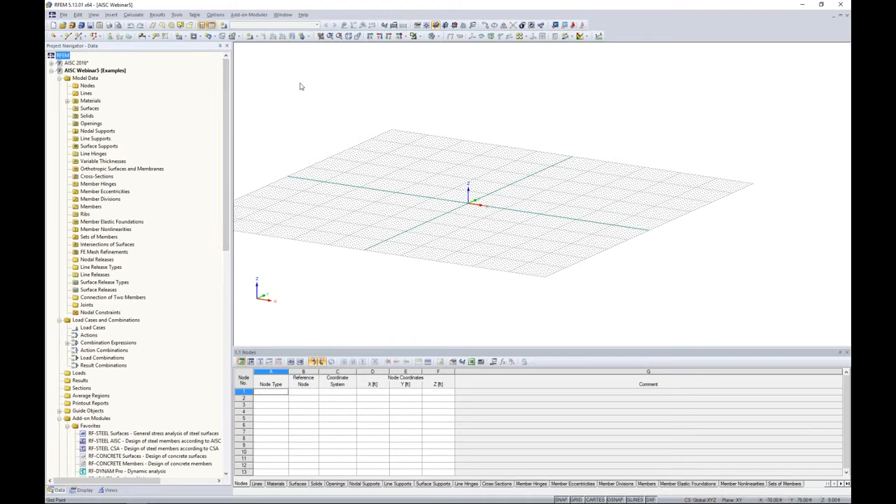So to begin with, we want to start off with drawing a truss. Now, we could normally go in and create our members individually and snapping to different points, but under Tools, Generate Model Members, we have several structure generators here: 2D frames, 2D trusses, 3D frames and trusses. We can even generate stairs. So we'll start off with a 2D truss.

And up pops our dialog box, and you'll notice that we have many different options when it comes to truss design. In addition, you can specify how the diagonals will be laid out, our web members. So if we take a look at some of these different options, they will go ahead and update depending on which selection we've checked here.

We'll start off with this second selection, and our diagonals will be the default for this first selection. The parameters are just our geometric information. The number of bays, we can set this as 6. The total length, which would be the span length, we'll set this as 50 feet. The total height is going to be measured right here at the center line, set to 7 feet.

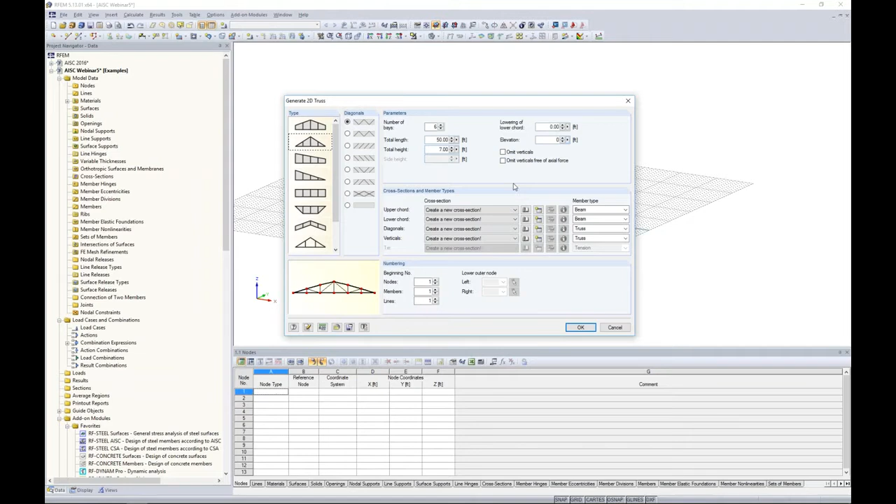Now we have a couple other options here. We can lower the lower chord member here by a certain distance. For example, if we set this to 10 feet, you'll notice how this picture changes. Same goes for elevation - if we make some changes here, then our picture is updated for how our truss will be generated. So moving on, the cross sections and member types.

So we must define the cross sections for our chords, both upper and lower, as well as our diagonals and verticals, our web members. The program is telling us that we need to create a new cross section. So for this, we will open up our cross section library.

You can see here that we have many different cross sections. For today, we'll begin with the rolled sections, and in particular the HSS. So when I enter into this dialog box, over on the left, we have some filters. For today, we'll be working with the AISC, but you can see here the ADM, we have Canadian sections, and even further, we can filter to the AISC 14th edition or the newest 15th edition.

Now, for square and rectangular HSS members, we do have a rather long list. So what's useful in this situation is to create a favorites group. With a favorites group, you can select a handful of sections that maybe you use quite often. And for today, I created a favorites group called USA that just has some sections relevant to today's webinar.

So now for my rectangular HSS, I can choose my 12 by 8 by 0.5. Regarding material, when you first create a new file, concrete 4000 PSI and steel A992 are going to be the default materials. For an HSS section, we actually want to choose a different material from our database.

For this, you can import in from the material library. Now, this looks similar to our cross sections. Over on the left, we have our filters, which we'll set to ASTM, and we have implemented the latest materials from the 2016 standard here. Again, an even longer list. So we can utilize that favorites group where we've added a handful of materials.

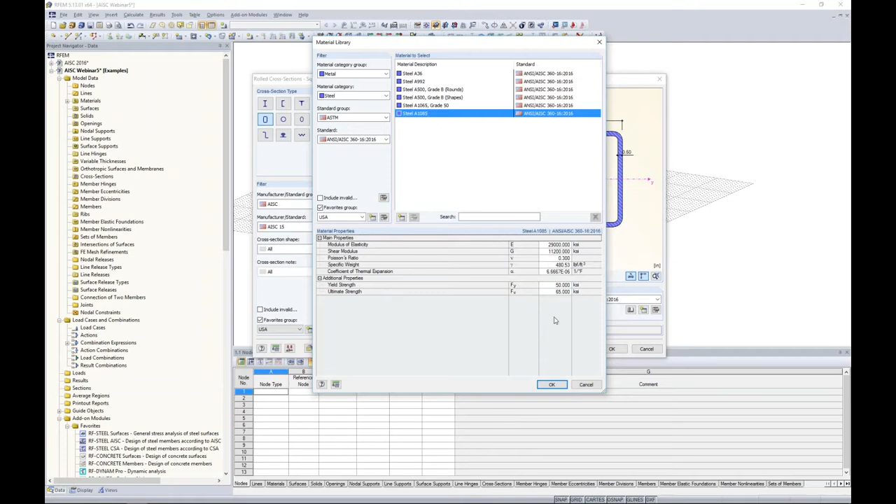Here are material properties listed down in the table. So once I've created this material, I can choose it from my selection box here. We click OK, and we click OK once again. Now, that same material and cross section is populated for all of my members.

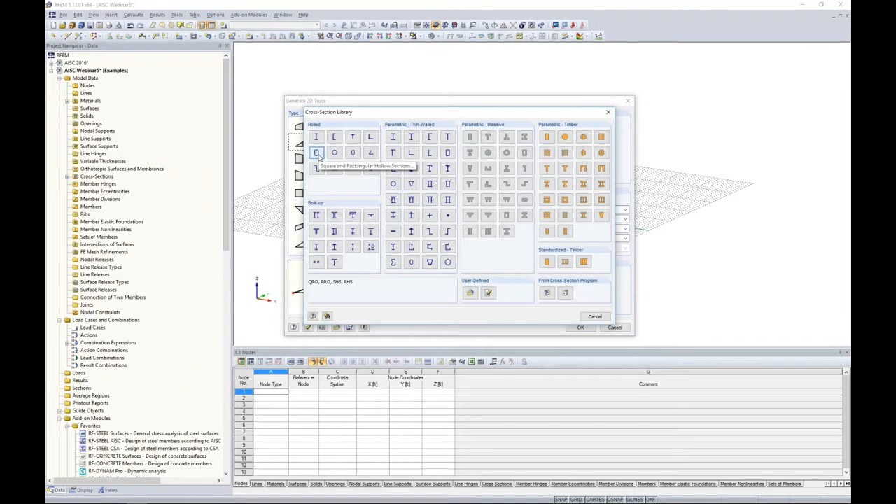Well, for the diagonals and verticals, I actually want to create a new cross section type, again under HSS, under my favorites group USA, and this time I want to choose a square HSS 5 by 5 by 0.375. I want to choose steel A1085 for my dropdown.

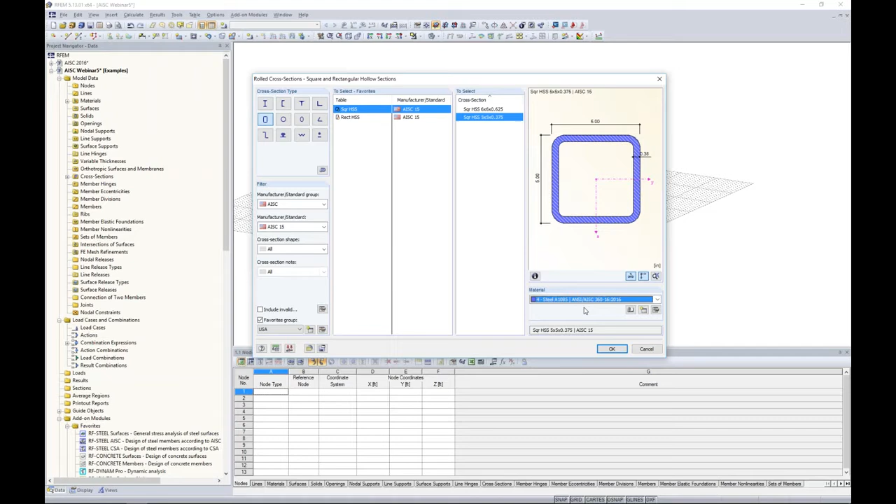You can see I accidentally entered it in twice here, no problem. We'll select the fourth material here, 1085. That will always be available now when I go to draw a new member because I've defined that material within this particular file. And I click OK. For the verticals, we've already defined the 5 by 5, so now I can choose it from my drop-down box here as well.

Regarding the member type, this is important because you can see here that we have many different members within RFEM. You can choose a beam member, a rigid, tension only, compression only, cables, because we are a nonlinear analysis program. So a beam member is going to be nothing special, just a typical beam or column.

A truss member, which the program automatically inputs, is going to set a moment end release, so we're only transferring axial and shear forces. That's just a quick application rather than manually applying those moment releases for our web members here.

Once we're done, we can click OK. You'll notice that our input material is listed here. The blue is what we're not using. I input steel A1085 twice, so all I need to do is select that, hit the delete key, and now we only have one listing of 1085.

Moving on to the columns, I'd like to just draw a member as we would within our toolbar, a new single member. I want to define a new cross-section type, and I'm going to choose my rolled hot sections, but a W shape here.

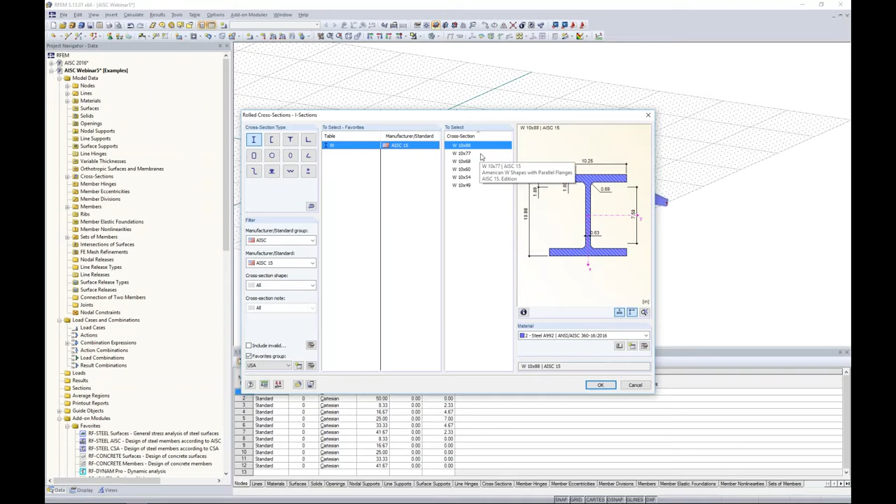Activating my favorites group down here with my checkbox, I've added in some W10 by members. Maybe I'm not totally sure which 10 by member I want to go with yet, so I'm going to select one of these sections from my favorites group. We'll start off with a 10 by 88.

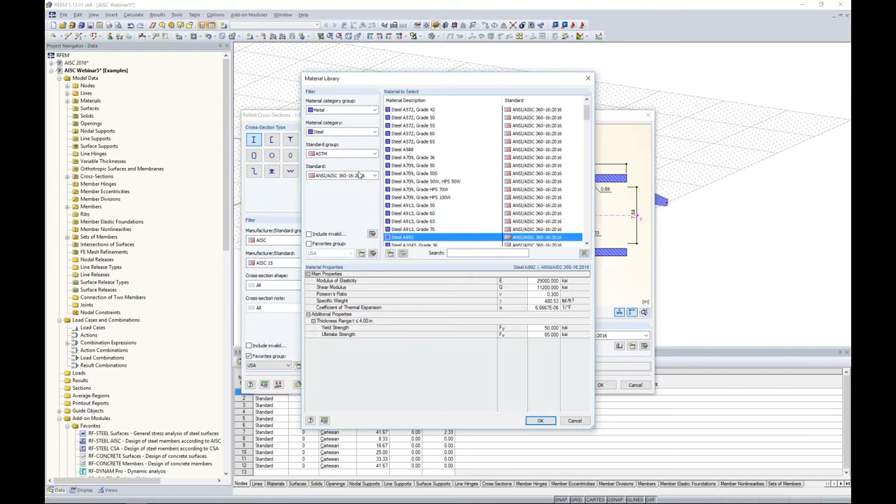Now, Steel A992 is one of the defaults within the program. Currently, it's set to the 2010 standard. At some point when the 2016 is more widely used, we'll transition to the 2016 Steel A992 to be default. But for now, if you'd like, you can change this to the 2016 Steel A992 for consistency. We'll click OK.

The member hinges, we'll leave these as fully fixed. We'll see a little bit later on how to apply a moment end release. I click OK. Now, typically, I could snap from one point to the other to create my columns, but we have a nice feature here.

All I need to do is specify the length and direction. So I'm going to specify my columns at 20 feet in height, and I want to draw this column member perpendicular to my current work plane, which you can see here in the negative direction.

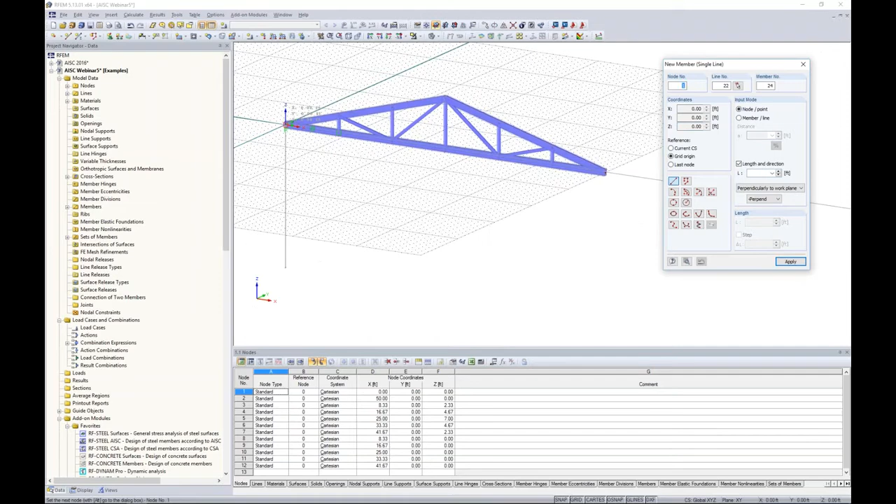Now when I just snap to the end nodes of my truss, I hit my right mouse key to escape, you can see that those columns were automatically drawn in the right magnitude and direction.

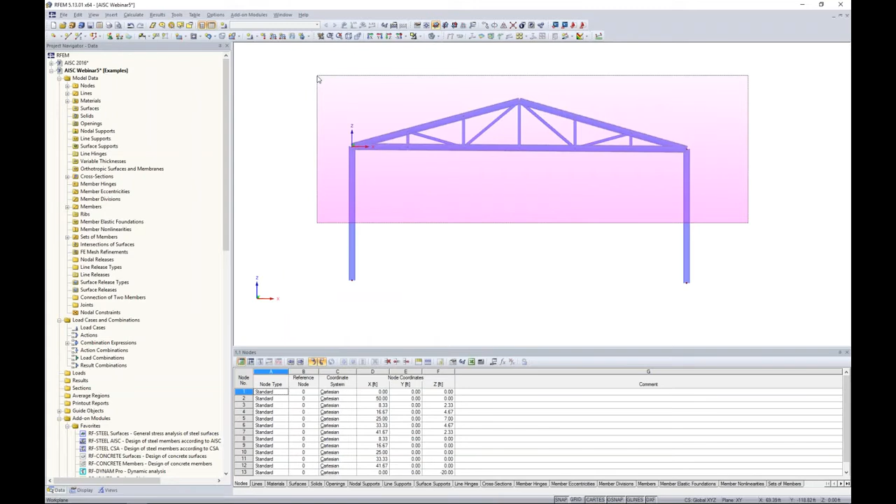Now that we have our first frame and truss drawn here, I'm going to use my selection box, and you'll notice that I'm paying careful attention to not select my nodes down at the bottom, and there's a reason for this. Just like in AutoCAD, with this selection box, we drag it over our frame.

I'm going to turn this into wireframe view and zoom in here. Holding down my control key, I'm going to unselect a couple of these nodes at either panel point on either side of the truss. Now you can't really tell graphically, but there's a reason why I'm doing that.

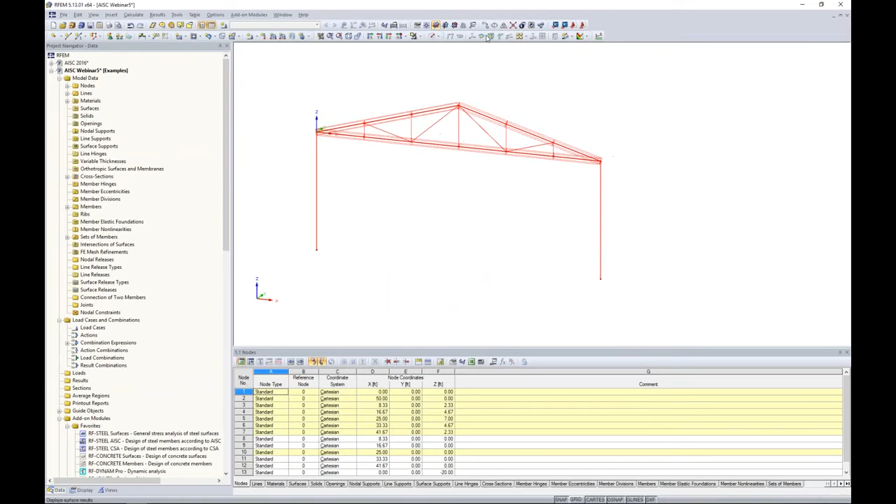We're going to move on to the Move Copy tool. We're going to create 3 copies in the global Y direction of 20 feet. So Move Copy, nothing too special here. But under this option, Edit Expanded Settings, we can actually create lines between copied nodes. This is why I was careful to highlight some nodes and not others.

Even more so, we can assign a cross-section to those copied lines, or in other words, we're going to create members between the copied nodes. If you want to utilize one of the cross-sections already within the model, you can select it here from a template member, or we can access our cross-section database.

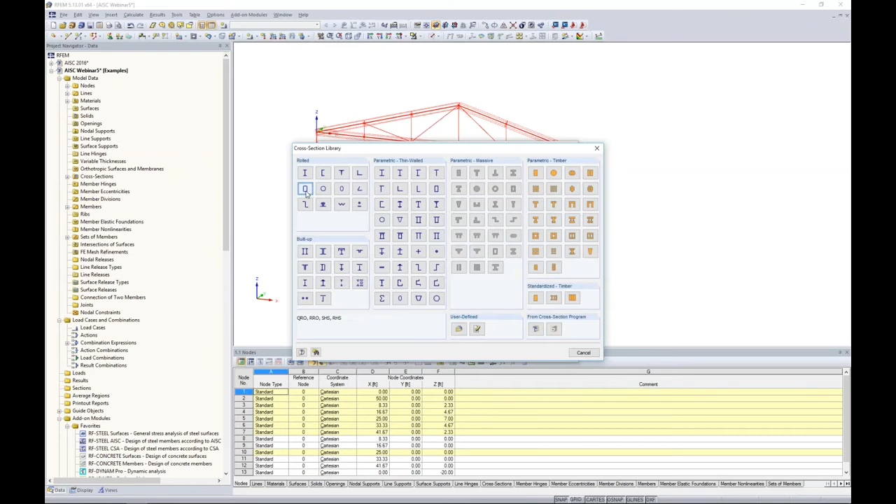This looks familiar from what we've seen before, and we can choose once again a new HSS member. This one will be a 6 by 6 by 0.625. From my drop-down, I can select my Steel A1085 material.

I click OK. The member hinge, right now it's set to fully fixed, so that's what a beam type is. Now I could easily change this to a truss member if I'd like to release the moment by just simply changing the member type here, or you can always manually apply a member hinge.

By creating a new member hinge, you'll see here that we have 6 degrees of freedom, 3 in translation, 3 in rotation. You can fully fix or fully release these. The program's making the assumption that you probably want to release the moment. We also have partial fixities with these spring constants.

So if you don't have fully fixed or fully released, but somewhere in between, you can specify this spring constant for any one of the degrees of freedom. Lastly, we do have nonlinearity.

If we take a look at the diagram and expand these details, we can account for things like tearing or yielding for our member ends. So it's quite powerful in terms of the nonlinear capabilities as well.

For today, I just want to create a moment release. If I hit OK, that moment release will now be available. That's member hinge number 1, and I can select it from the drop-down for the member end as well. So I click OK through all of these dialog boxes.

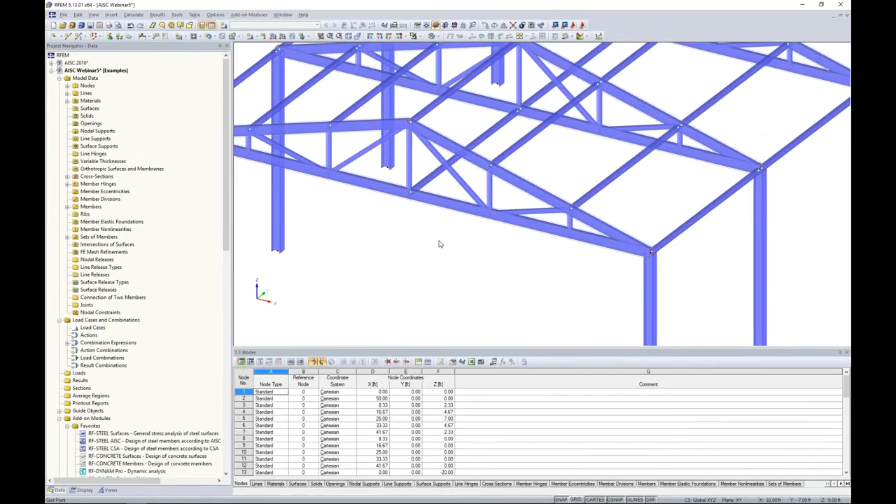At the bottom chord, I don't have any lateral restraints except at the midpoint, where I left one HSS member bracing my bottom chord. So that's really it as far as the geometry for our structure.

Now we want to support it. Up in our tools, we have a new nodal support. We also have a line support for maybe the bottom of a wall, and next to that, a surface support for, let's say, a slab on grade if we want to apply soil spring stiffness. For today, we're sticking with the new nodal support.

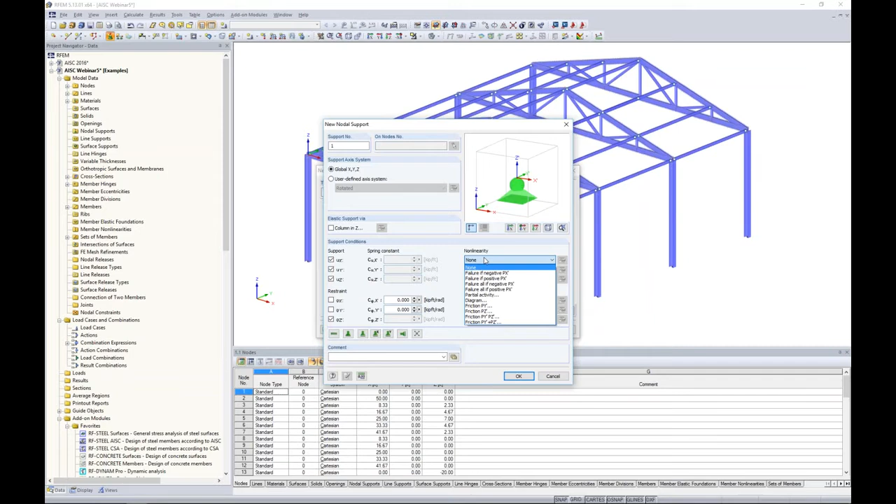We have some defaults here: hinged, rigid, fully fixed. We also have sliding. Of course, you can create your own new nodal support definition, and this should look quite familiar—similar to our member end conditions. We have our 6 degrees of freedom, partial fixity, and nonlinearity to take into consideration if we'd like. Nonlinearity might be important for sliding or friction supports. For today, we will stick with one of the defaults, which is fully rigid.

I click OK. All I need to do is rotate my structure around here, select the bottom nodes, and my rigid supports are applied.

Now, if I think the supports are maybe a little too big for this structure, what's nice is that I can always right-click on these supports to decrease the size. Now you can see all of them are a little smaller in size. The same thing goes for loads applied to our structure graphically as well, just something to point out there.

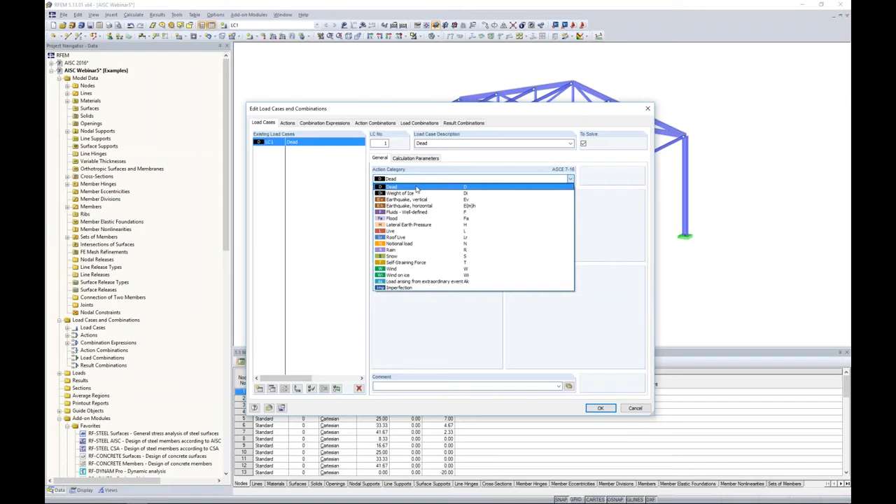Okay, so the geometry and supports are completely done for our structure, so we want to move on to loading. For this, we want to create a new load case, available in our tools. The first load case description will be dead load. The action category is set to dead. Action categories are important because the program needs to know what load factors to apply to which loads.

Based on the ASCE 7-16, the self-weight can automatically be accounted for within the dead load with this checkbox here. You can see -1 in the global Z direction. Our global coordinates are shown here.

Creating a new load case, we'll call this one live. The action category will be set to live, and self-weight will be unchecked here. For our third load case, we'll call this one wind 1, with the action category set to wind. And for our fourth and final case, we can just make a copy of this and rename it to wind 2.

Jumping to combination expressions, you can see the program is going to automatically create 2 expressions, LRFD and ASD. If we're curious to know what exactly the expressions are in relation to the code, we can click on this little info button, which will show us all of the ASD load combinations directly from the ASCE 7-16 section 2.4.

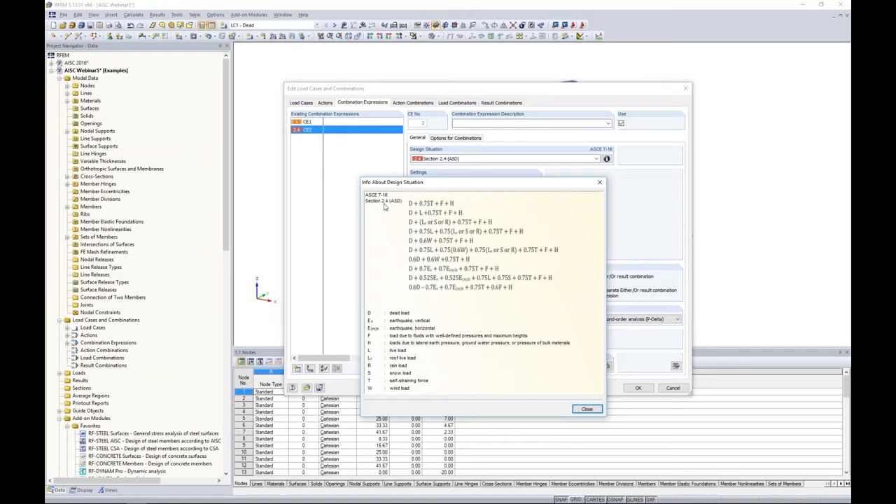To lay this out more clearly, we're going to jump to the load combinations. These are the actual load combinations generated by the program for both LRFD and ASD, only applicable to the load cases we've defined—here you'll see dead load, live load, wind 1, and wind 2. Lastly, we have our result combination, which is just an envelope solution.

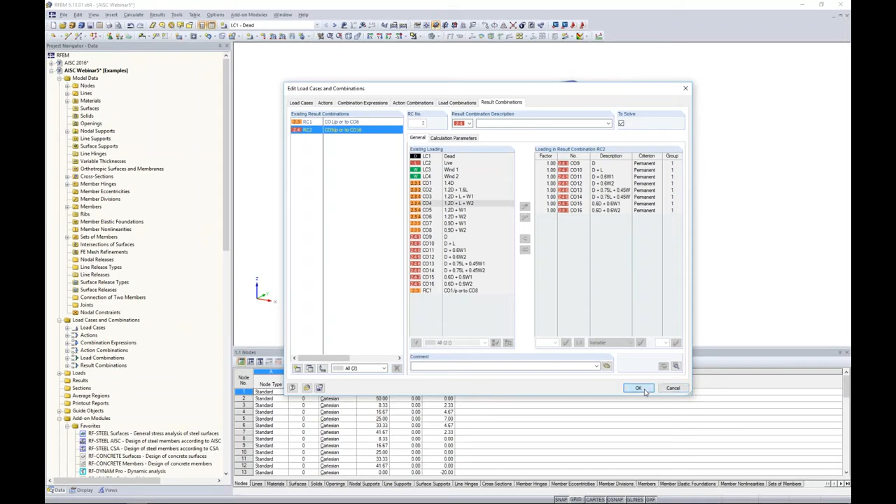If we're looking for maybe the highest or the max or min forces on our structure for all of the LRFD load combinations, we'd want to look at a result combination. We also have a result combination for ASD set here for maybe seeing what the worst case deflections are for all load combinations together. So once this is done, we click OK, and we're back in RFEM.

Now, utilizing this drop-down box, we want to make sure we have the correct load case available here before we move on to applying loads to the member. Dead load, we're going to assume that just self-weight is fine for today's example. I'm not going to add on any other loads. So we'll scroll then to live load.

Now for live load, under tools, generate loads, we have the option here for area loads on members via a plane. The first thing we want to define is the load magnitude in the global Z direction. The magnitude here will be -0.05 kips per square foot. Then we just need to graphically select our corner nodes.

So the first thing to select would be over on the left side of the structure. We're going to choose one plane here. Now I want to do the same thing on the right side of the structure, and what's nice is I can do this all within one step. So now we have both planes defined on either side of the structure.

We can remove the influence from either single members by individually clicking them, or we can choose a reference member so that all members parallel to that reference member will be excluded from this load. For example, if I'd like to exclude these intermediate members between my top chords, all I need to do is select one of them. All of them are now not selected to be considered for the load. I click OK, and we can see here that the load is now shown graphically.

Now, this is a pretty clean look, but if we're interested in how the load is being distributed to my members, I can right-click and display separately. So now we can see exactly what those member loads are based on their tributary area, and you'll notice that all of my intermediate HSS members were not taken into account.

Moving on to wind load. So for wind load, under tools again, we have generate loads from either snow loads or wind loads. For wind loads, we have vertical walls with roof according to the ASCE 7-16. Now, same thing goes for snow load as well. The wind and snow load generators are for pretty general type structures like what we're utilizing today and what you see in this picture. Anything outside of these general structures will need to be accounted for by manually applying those loads.

So we want to put in some velocity pressure and other components that are important in terms of determining what the load should be according to the ASCE 7. We'll just go with the basic wind speed of 70 miles per hour. The building mean roof height can be set at 23.5 feet. The rest of the factors, we'll leave as default.

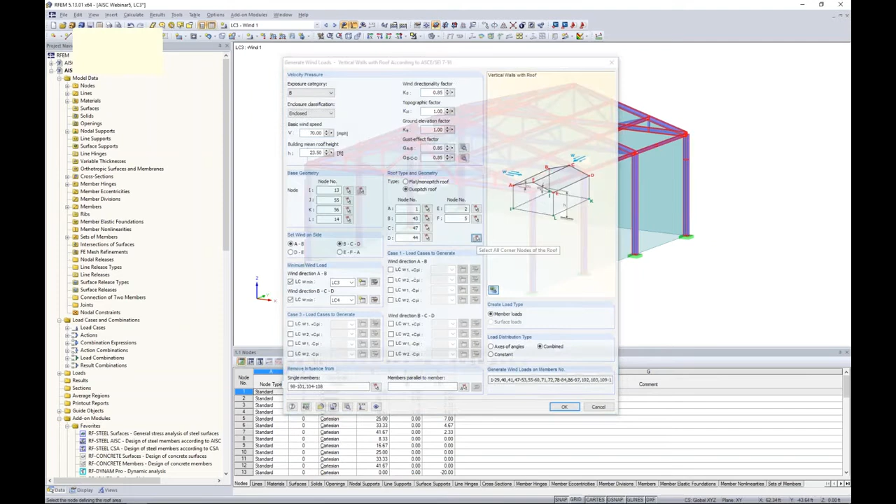And then for a dual pitch roof, I'm going to select my 6 nodes up here at the top of my roof. Now, if you incorrectly define this geometry in some way, the program will gray out the OK, so you won't be able to apply the load, and you'll know that you did something wrong with selecting the geometry.

We can generate case 1 and case 3 from the ASCE 7. We also can take into account minimum wind loads from this standard. For the sake of today's example, I'm just going to account for minimum wind loads in 2 directions. For the first direction, we can set this to the load case we previously created, LC3, which was wind 1. For the second wind load case, we can set this to LC4. Again, you can remove influence from single members here or members parallel to a reference member.

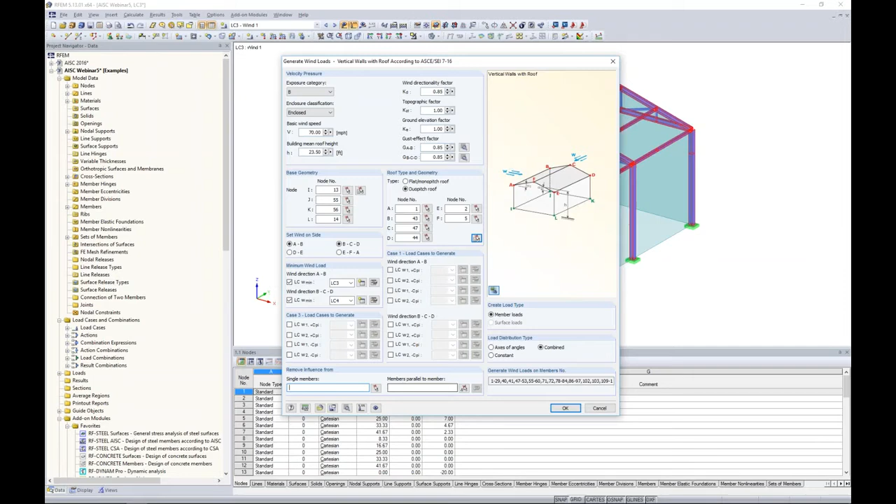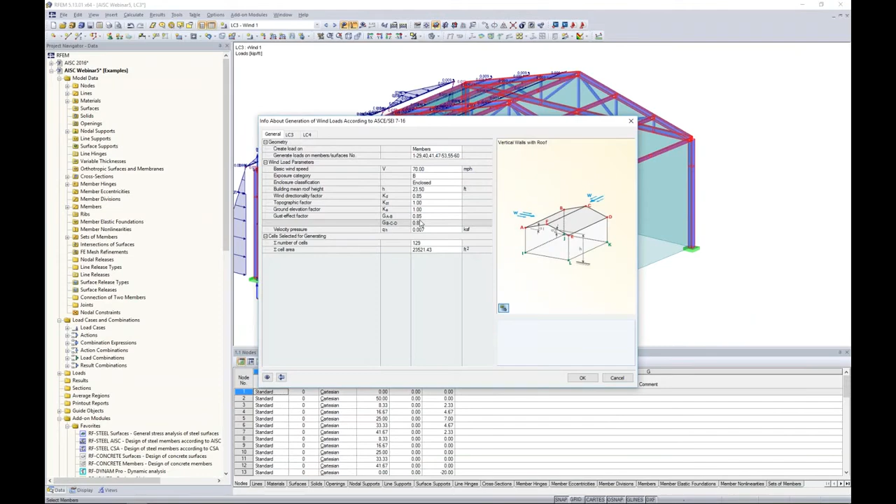For our case, if I graphically select my web members, maybe I don't want the wind load attributed to these web members with my truss. So I just graphically select all of them. You'll notice they're now not selected in red. I click OK, and now the program is going to give me some more information based on the calculations that were done.

I click OK, and now we can see these wind loads applied to the structure. This is for load case 3, and I can take a look at load case 4 from the other direction. Okay, so loading is complete. We can scroll through some of our load combinations to see how these are applied together.

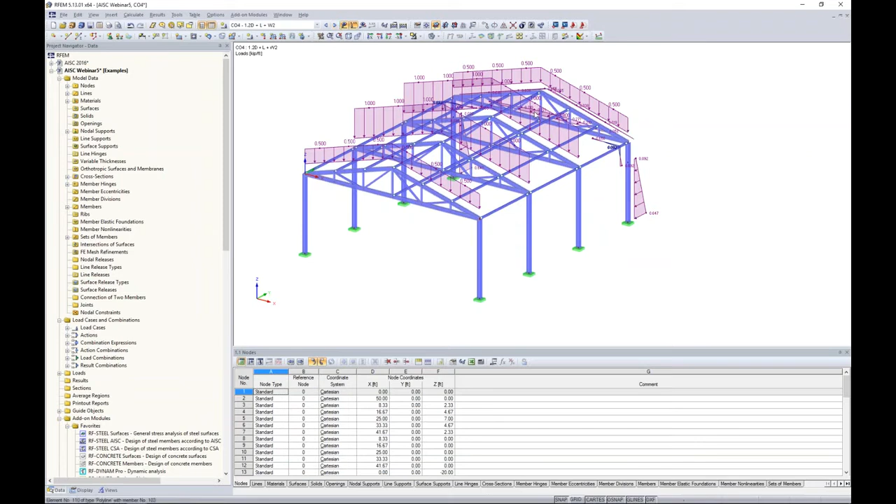Now, not too many loads for today, but just know that loads can graphically be displayed here. So we're almost ready to run an analysis, but I do want to first jump back to the PowerPoint.

In the 2016 edition, the direct analysis method is talked about in Chapter C. Within Chapter C, we have several stability requirements. These include member deformations, second order effects must be accounted for, such as P delta, P little delta, geometric imperfections, stiffness reduction, and uncertainty in stiffness and strength.

For the sake of time today, we just don't have enough time to go through each one of these. But what I will say is that most of these didn't change. We'll go over what did change.

I previously did a webinar on AISC 360 2010 steel member design in RFEM, with a recorded webinar available on our website and on our YouTube channel. What I did is I really went into detail on Chapter C to show you exactly how to take into account each one of these stability requirements within RFEM. So a very helpful webinar if you're looking at P delta, stability requirements in general, and how to apply that to the structure.

For today, though, what I do want to mention is just a change that was made in the 2016 to the adjustment of stiffness in section C2.3. Now, in the code, the AISC tells us that we must apply a 0.8 factor for axial and flexural stiffness. It should be applied to all members that contribute to the lateral stability. Well, then it goes on further to say, to avoid artificial distortions, let's go ahead and apply this to all members. Okay, no problem, 0.8 factor applied to those stiffnesses. There's also an additional tau sub B factor that should be applied to flexural stiffnesses.

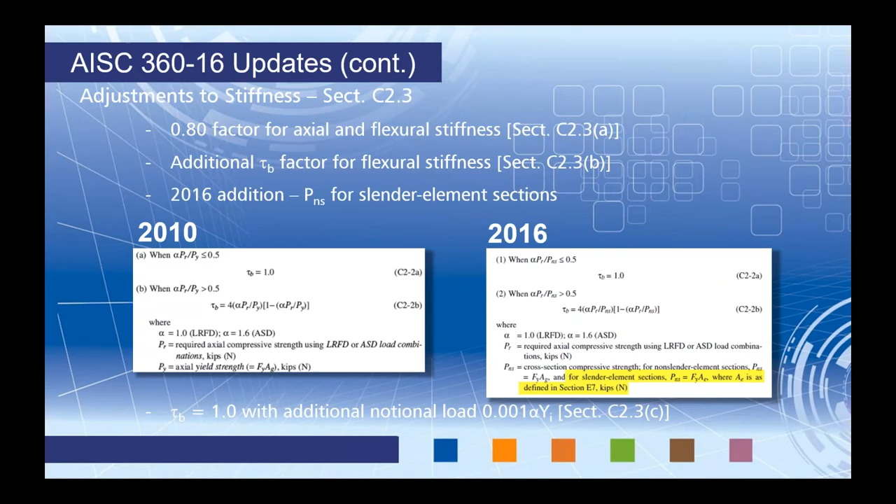Now, the code goes on further to say, forget about all these equations, just apply the conservative factor, tau sub B equal to 1.0, if you want to apply some additional notional loads on top of that. And that's all explained in the standard, as well as I previously went over that in that last webinar. So how does that affect us for today?

Well, going back to RFEM, what I'd like to do is select the entire structure. I'm going to right click, and under member, I'm going to choose edit. The modify stiffness tab is currently set to none. That's default.

If we choose this drop-down box, you can see here according to AISC 2010, tau sub B can be set to iterative. Iterative is going to use those equations from the standard to determine what our tau sub B factor is for each iteration. We can also just simply set this equal to 1.0, as I mentioned, with some additional notional loads applied to the structure.

The flexural stiffness and axial stiffness multiplication factors, that 0.8 factor, will be applied here. The way our program is set up, the gross area is something that's very easily known from RFEM, but the effective area is not determined until much later on within the steel module. So at this time, it's just a limitation of the program that we cannot account for slender members.

Realistically, it's not too often that we're probably designing with slender members. It's definitely not unheard of, just not so common. So when you're not designing with slender members, nothing changes. You can continue to use the 2010 reference that we've selected here.

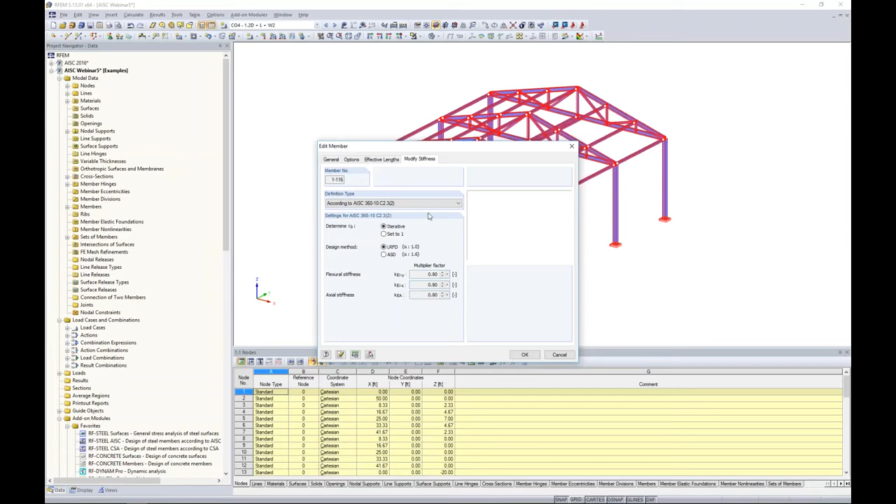If you are designing with slender members, use this option for all the other members. For your slender members, you have two options: you can either set this equal to 1 and apply those additional notional loads, or you can choose the multiplication factors here to manually apply your reduction in stiffness to those slender members only. That's just something to keep in mind. Today we don't have any slender members, so we can just keep everything as defined here.

Now we are ready to finally run our calculation. If I go to calculate all, the program is going to cycle through my load cases and load combinations. It is a nonlinear analysis, taking into account P-delta effects and that tau b stiffness reduction. Finally, we'll be presented with our analysis results within RFEM.

Once this is done, as I mentioned before, the results tab is now available in our project navigator. The program immediately jumps to the deflections, so we can scroll through our load combinations to see how those deflections are changing based upon the different loads.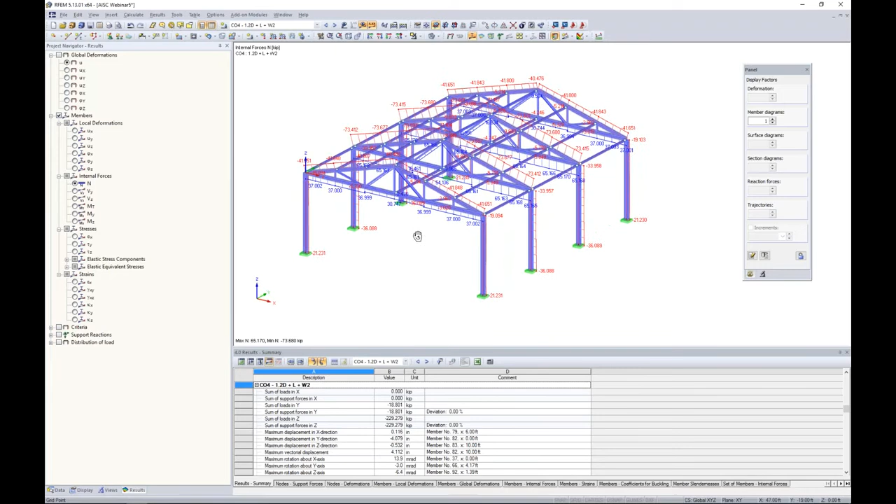We are also probably interested in the internal forces. So I can expand this tree here, select members, and maybe I want to take a look at my axial loads. All of the axial loads are presented to us here graphically. Remember, you have a lot of control over how you're viewing these results in the graphics window, under the display, for example, there's this whole results section.

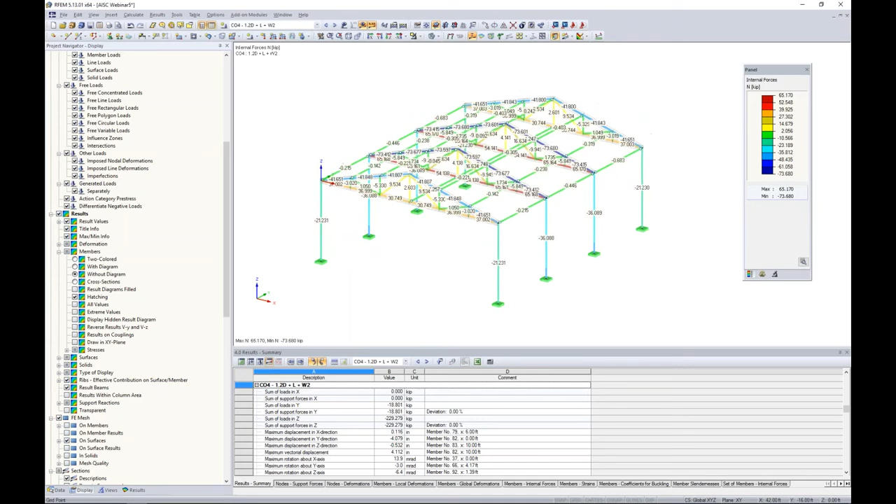Under members, if maybe we want to change this to a color diagram, we can, so now we have a colored panel. We can change this to more of a wireframe view with the values written on here, or we can render the cross sections with colors as well. So again, very flexible in how you view your results, and you do have a lot of power over that.

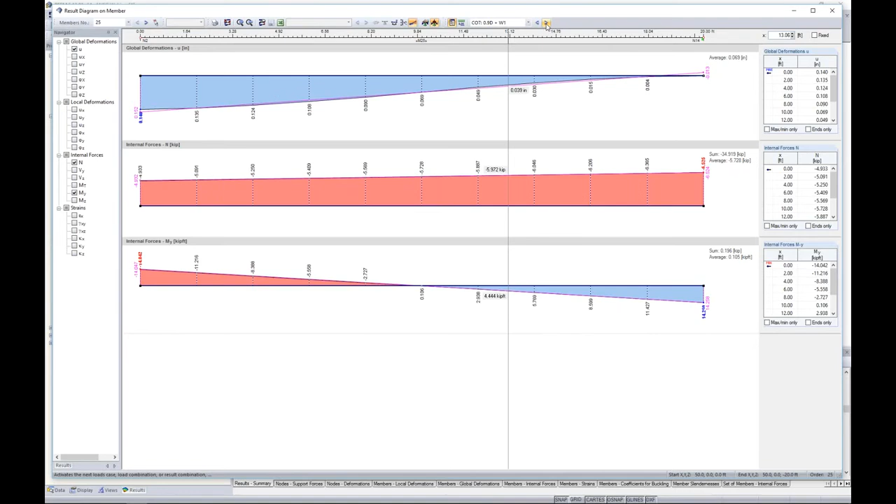For any individual member too, you can always right click and go to the results diagram. The results diagram is just going to give us a little bit more information for our various forces and deflections along the member length. We can even add up and sum these forces, or average them out. You can add them to printout reports, and change the load cases and combinations here. So this is just a more detailed look at what's going on for that particular member.

Okay, so I think that concludes the analysis portion. I did want to mention support reactions, of course, are all available here. So I do want to move on now to the design.

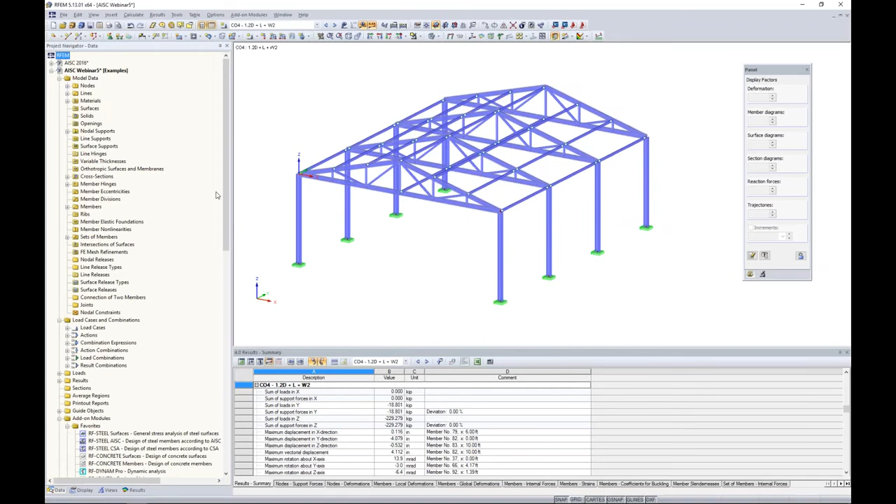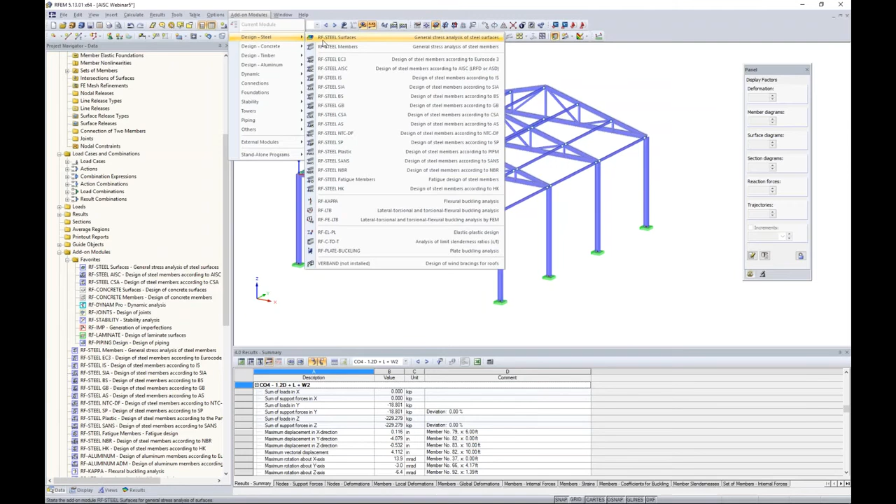I want to make the clear distinction that we are now entering into one of the add-on modules. The add-on module RF Steel AISC can be accessed here in our project navigator. You can always right-click on any one of these modules, select it as your favorite to move it up to the top of the list. Under the add-on modules drop-down box, we can access them there. They're categorized a little bit better according to the various materials and applications, and we can choose RF Steel AISC.

So up pops our add-on module. It's nothing more than a dialog box. I don't have to worry about remodeling anything, redefining cross-sections, materials - all those internal forces, everything is brought into this add-on module.

All that we're doing is defining a little bit more information that's relevant to the AISC specifically in order to get that unity check from the standard. So what I want to first start off with is I'm going to rename this case. I go to File, Rename Case, and we'll call this one Columns.

Now, by all means, you can design all members together in one case. If you'd like to keep them separate, such as columns, top chord, bottom chord, you can create different cases for them. So for this one, we'll start off with our columns.

In the design, we have available here the 2016 edition, both LRFD and ASD. We also have the 2005 and 2010. So sticking with the LRFD 2016, I want to select graphically my column members. So back in RFEM, I highlight these column members.

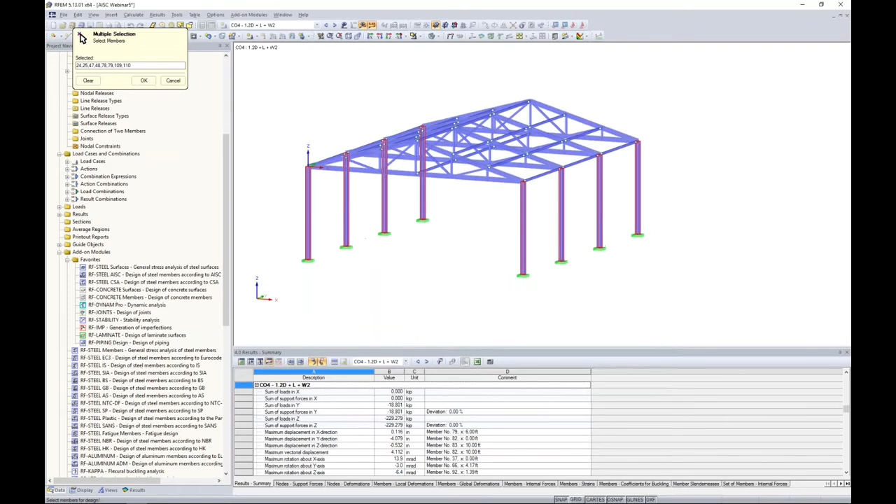I click OK. The ultimate limit state design, I must define which load combinations I'd like to consider. So I'm going to move all of my LRFD load combinations on the right side of this tab here. As far as serviceability, I'm going to move all of my ASD load combinations, because we can account for serviceability checks as well.

Moving on down my list, my materials - steel A992 was automatically brought in. We don't need to do anything further here. Cross sections, same thing - W10 by 88 was brought in from RFEM, so we can continue to move on.

Intermediate lateral restraints - this is going to affect our unbraced lengths for lateral torsional buckling and torsional buckling. You can see here that we can define lateral restraints for our top and bottom flanges. We can increase the number along the member length. And in turn, on this next tab, you can see that's going to affect those torsional buckling as well as weak axis unbraced lengths.

But we'll get into that in just a minute. So if you do have some type of bracing for the top and bottom flange, you can apply that here. Now, currently in development, and we hope to have this released soon, is the ability to define top flange versus bottom flange versus both flanges versus no flanges braced for our intermediate bracing. Right now, you either need to consider all of them braced or none of them braced. So again, we hope that improvement will be available soon. Now, we don't have this consideration today for our columns. We'll assume that there's nothing bracing the top or bottom flange.

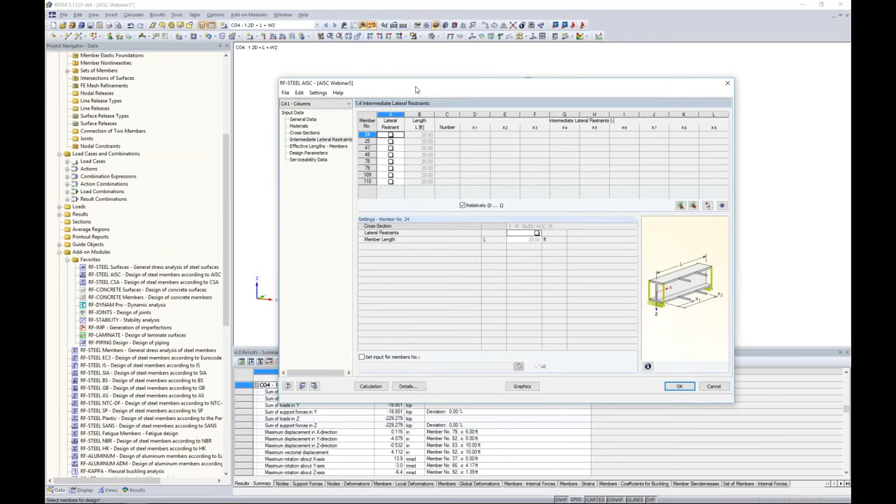Effective lengths is going to be our stability checks. We have our strong axis bending here, or buckling. We have our weak axis buckling, torsional buckling, and lateral torsional buckling. Now, because we are designing these members per the direct analysis method in Chapter C, the code tells us that we can set the effective length factors equal to 1.0. This is in contrast to the effective length method in Appendix 7, where you do need to adjust those K factors. So moving on with Chapter C, then, we can leave these all as default as 1.

Now, the unbraced length is going to default to the full member length. Unbraced lengths are incredibly important because they really do affect our design. So the software is only as smart as what you model, and it's going to default to the full member length. Now, if we had some additional members in here that we would consider braced in either the strong or weak axis, we would want to adjust the unbraced length. And we'll actually do that with our next case later today. For both strong and weak axis, I'm going to assume that it is the full length, the full 20 feet, for my unbraced length for both buckling and lateral torsional buckling. So we can move on.

The design parameters are going to be some additional variables. For example, our C sub B factor, which we can see that's default set to 1.0, which is a little bit more conservative. We can change this to equation F1-1. Or you can manually override this. We also have some additional variables here - these are just important for some of the various equations in the AISC.

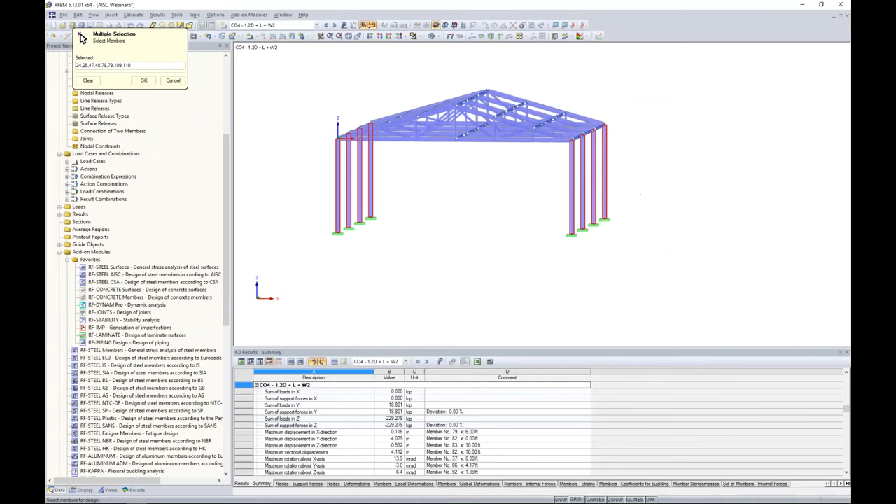Serviceability data. So this is how we check our deflections. The first thing I want to do is choose member from my drop-down box here, and then graphically I can just go back into Rfem and select my columns. So I select these columns, I click OK, and now each one of those members is listed here.

The reference length is again going to be the full length of the member, the 20 feet. We can add in here a pre-camber if we had one for deflection considerations. And then the beam type either needs to be set to beam or a cantilever.

So the question is, okay, we've identified how we're going to compare these deflections, but what exactly is it going to be compared to? What is my limiting deflection ratio? Well, under the details tab, we have our serviceability input here. You can see that the limiting deflection is set at L/360 for simply supported, L/180 for cantilevers.

Now, by all means, you can override this information as you see fit for your limiting deflection ratios. The deformation is either relative to the shifted member ends or the undeformed system. With the shifted member ends, the deflection will only be measured from the new distorted shape of that member and its member ends. In comparison, the undeformed system measures deflection from the original structure location before any loads were applied. That can give you very different results, and it's up to you as an engineer which deformation you'd like to measure. We'll keep this first case as the shifted member ends.

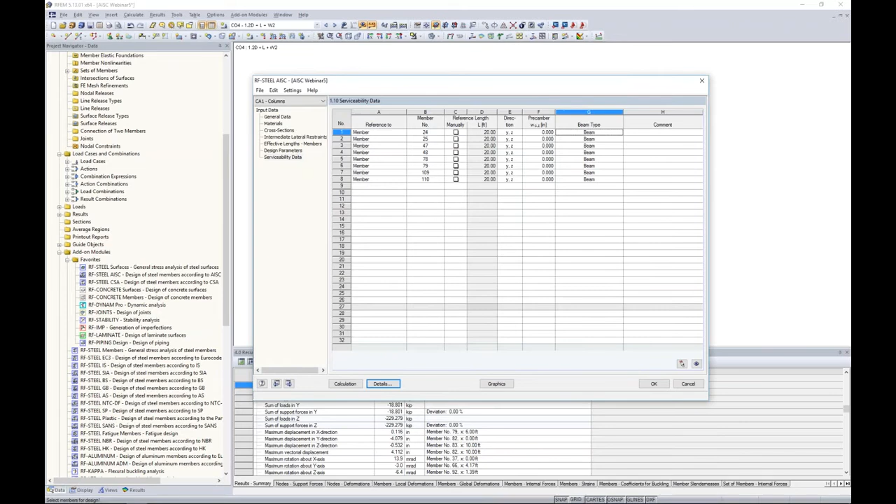I click OK, and I'm ready to run a calculation. Now, you see that it solves within a split second, and that's because we already have our internal forces from Rfem. All that we're doing is applying these equations from the AISC to give us our unity check.

And now our results tables are available to us. We can view design by load case, design by cross section — we only have one cross section available here — or design by member. Keep in mind you can export all of this information directly to Microsoft Excel if you want to sort further.

As I'm taking a look at design by member and scrolling down through this table, you'll notice that everything is synced up to Rfem in the background. So with an extremely large structure, you can imagine this is really beneficial to understand where exactly you're at.

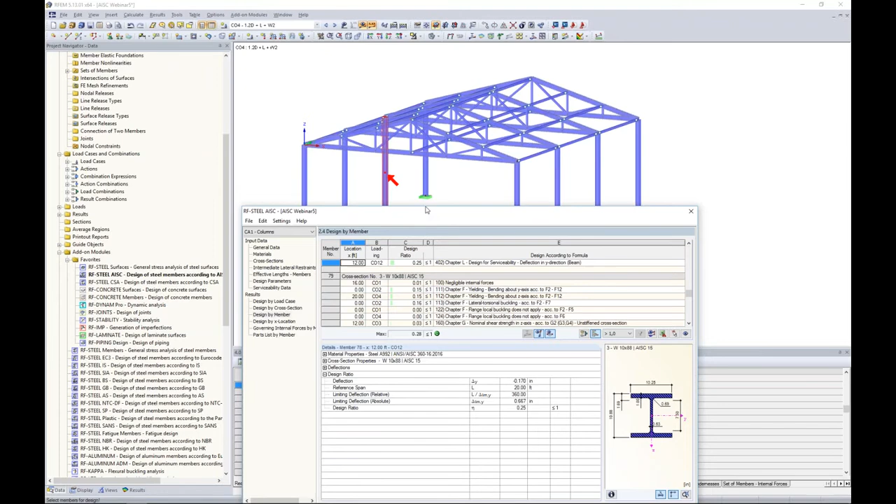Now, even more so, you'll see this big red arrow. That red arrow is pointing you to the location of the controlling internal force for that particular check. So if we're looking at member number 79 here, you can see we have all of the code checks for each chapter listed here — chapter F, chapter G, chapter E, and H.

For each one of these, if we go to lateral torsional buckling, for example, you can see the cross-section type listed here and how it's classified, whether that's non-slender, slender, compact, or non-compact. We have all of the variables that go into determining what that lateral torsional buckling unity check is, along with the code references. So very, very clear in understanding where the program came up with its numbers. It's definitely not a black box.

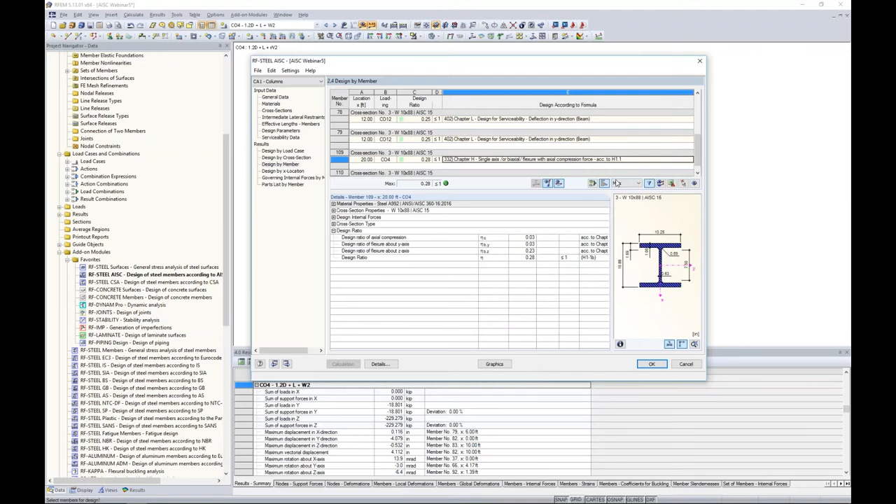Now, this is great, but you might say, gosh, that's just really too much information — I'm only interested in the controlling single code check for each member. Well, that's fine. You can easily filter here according to the max. Once I hit this filter button, it's only going to give me my controlling equations, which you can see — serviceability, for example, controls with a lot of these, chapter H for member number 109. So that way you're not filtering through all of the code checks.

We also have the material takeoff available here. Now, going to the graphics view, this is going to display our results. We're still technically in the add-on module RF Steel AISC, but we're viewing everything back in RFEM. With this drop-down box, you can see RF Steel AISC is selected, and we can take a look at our ultimate limit state design — just taking a look at those code checks.

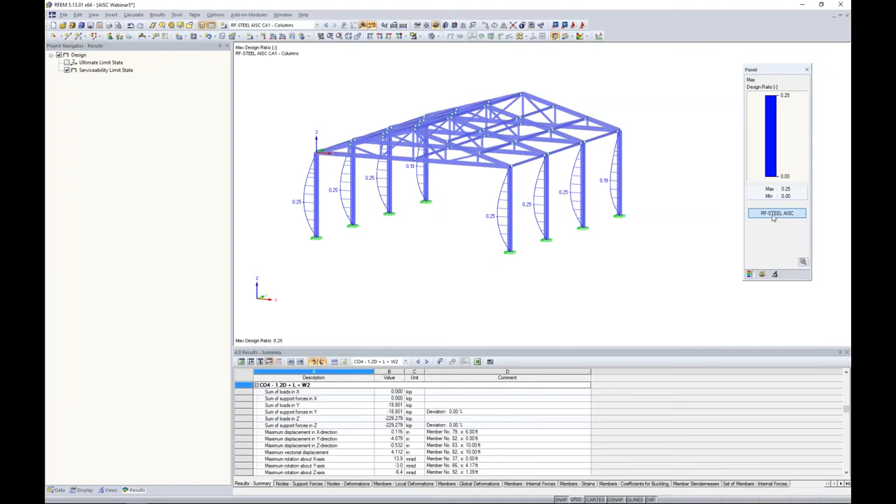We can also take a look at serviceability, which it looks like most are 0.25, for example, and controlling at the midspan. So jumping back to RF Steel AISC, that really shows you the results for just our columns designing our members.

Real quickly, I just want to mention optimization. Back under the cross sections, you can see here that the W10x88 has our max design ratio listed here after we solve for it, 0.28. Now, we can optimize. The default is set to no, but we choose this drop-down box and we have a couple options here.

You can optimize from the current row, meaning the program will choose any W shape from the AISC section. The other option is to choose one of your favorites list. Remember when we first drew this column, I had my favorites list USA with about 7 W10-by shapes, so with that favorites list I can optimize from just those shapes.

I hit calculate. The program gives an estimation based on the old internal forces with the old cross section, saying approximately you should get about 0.54, which is a little better than the 0.28 we saw before.

You'll notice this is highlighted in blue, telling you the cross section in RFEM is different from the cross section in this module. So you need to right click and export this cross section back to RFEM, and rerun your analysis so we get the true internal forces based on the correct stiffness with our new shape. What it's showing now is just an approximation, that's why it's highlighted blue.

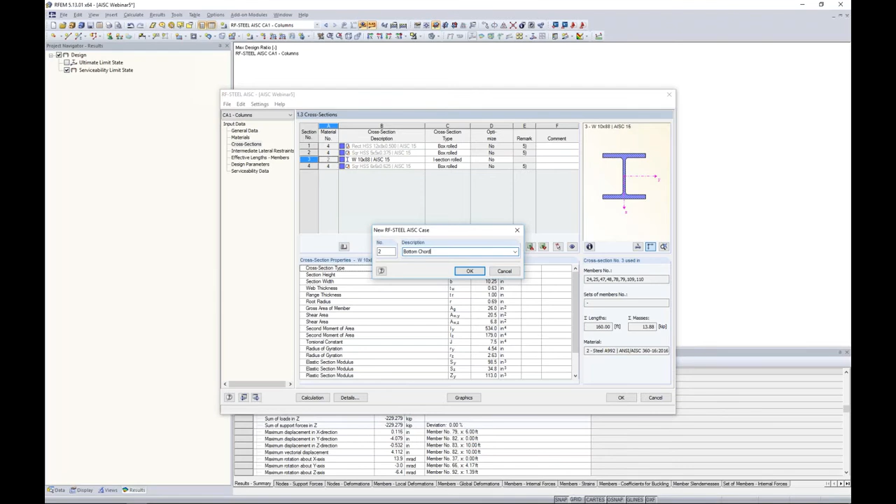Next, I'd like to create a second case. We'll go to File, New Case, and call this one Bottom Chord. I click OK, and it asks me to save changes to my original case, which is fine. Now you can easily toggle back and forth between either case.

Sometimes it's nice to keep them in separate cases if you want to design sets of members separately. For this next case, I'd like to go into more detail on the design of members versus sets of members. Ultimately we'll end up with the same results for both, it's just a different approach, and I think there are some advantages to sets of members over members.

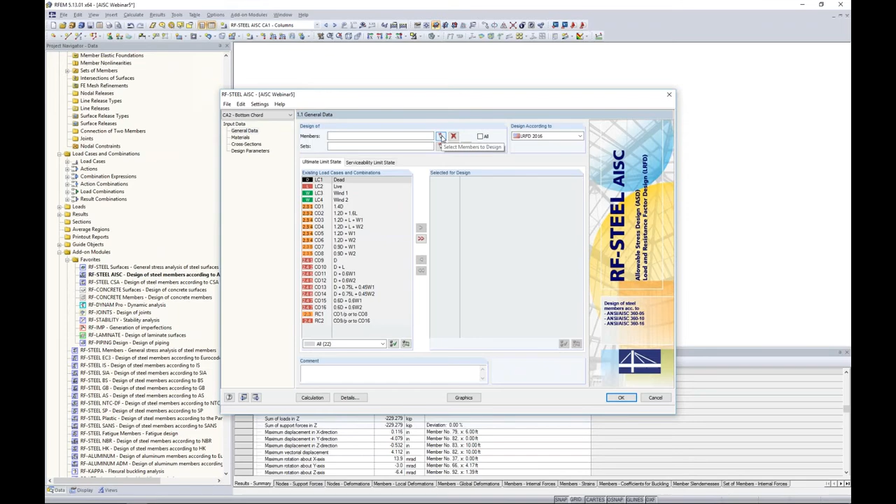First we define LRFD 2016, that's fine. I'll rotate my model, zoom in, and select my individual members for my bottom chord at this second frame. Oops, not that member. I click OK.

In turn, I'm going to select a set of members. A set of members was automatically created by the program when I generated these truss members. You can see a faint dotted line around all of my bottom members for this bottom chord, that's called a set of members. I select it and click OK.

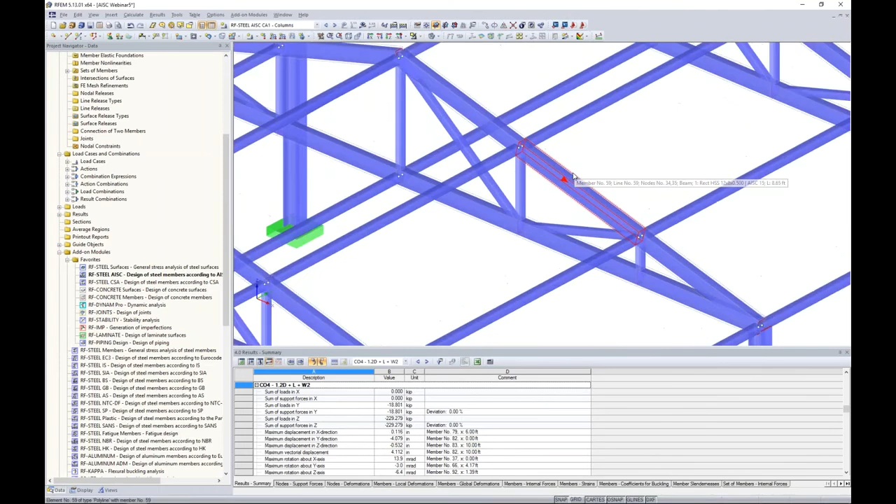Let me quickly jump back to RFEM to explain what a set of members is further. The program automatically created these sets of members for both the bottom chord and the top chord. If I zoom in, here's the faint dotted line around the bottom chord. Now the top chord, if I highlight this faint dotted line and select it, is the entire top chord, so this can actually be designed as one continuous member.

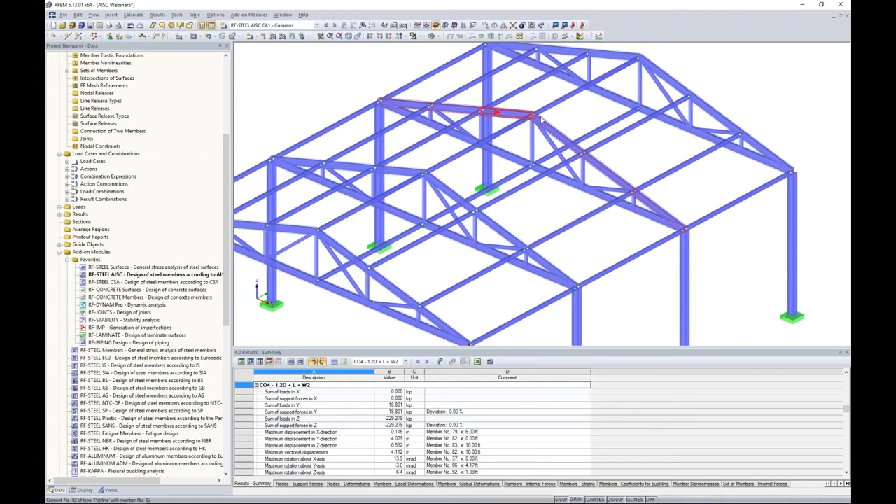What's very powerful about sets of members is it doesn't necessarily have to be in a straight line. It does need to be in a single plane, but it can have several bends. A great example is this top chord, but we could even design this column, this top chord, and this other column as one continuous member with a set of members. The program automatically did that for us.

Just so you know, you can hold down the control key, select several members, right-click, and choose Create Set of Members, which generates a continuous member with that dotted line around them. We're not doing that with these members, but jumping back to my current module, the RF Steel AISC, with my bottom chord, that's the difference between selecting members versus sets of members.

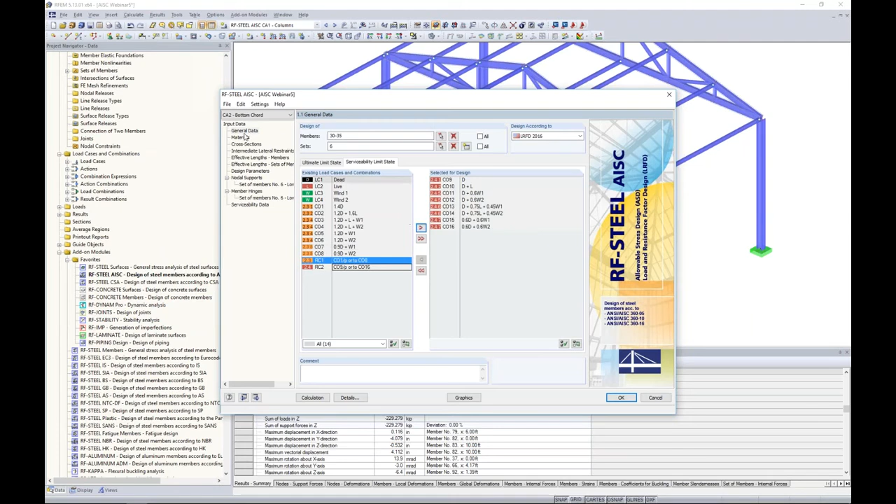Again, I want to choose my LRFD load combinations for ultimate limit state design. For serviceability, we will choose our ASD load combinations. Moving on down the list to materials, we had chosen Steel A1085 for HSS members.

This is now recognized in the 2016 spec as an approved HSS material, as I mentioned before. With 1085 and 1065, these have more stringent wall tolerances than the previous A500. So the code tells us we can now use the full nominal wall thickness for design, in comparison to the A500 where we had to use 93% of the thickness.

So how do we account for the full nominal thickness with this new material? Under the Details tab, you'll see a section Design Wall Thickness of HSS. Here is where we can uncheck this option so that we don't reduce the nominal thickness for HSS according to B4.2. So when using the 1085 or 1065, we can account for the full thickness.

Cross sections, HSS 12 by 8 brought in from RFEM. Intermediate lateral restraints, same concept as before for both our members and sets of members. Now we don't have any top or bottom restraints here for HSS members. It's just not relevant, so we will continue to move on.

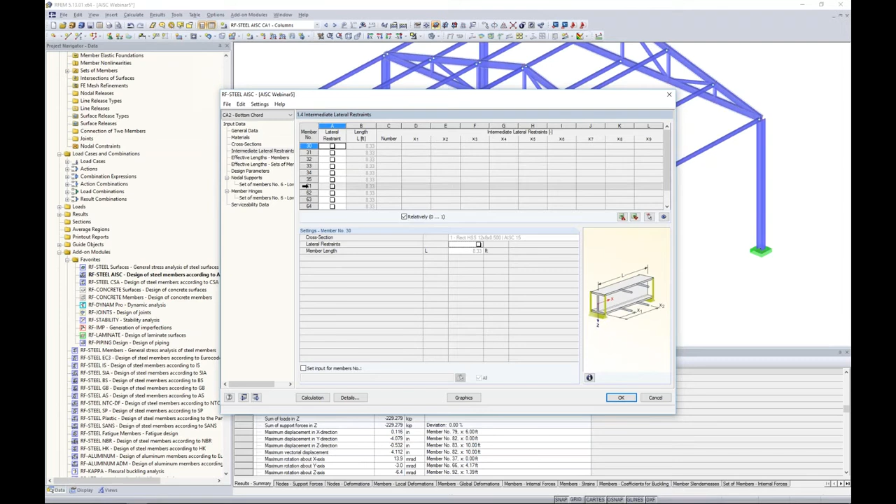So effective lengths for members, we also have effective lengths for sets of members, so we have two separate tables here. Looking at our members, you'll see that the buckling length for strong axis, weak axis, and both our torsional buckling and lateral torsional buckling are set to 8.33. This is incorrect. Again, the program only knows how the information is input into the model.

So this is why it's incredibly important to pay attention to unbraced lengths. I would argue that for this bottom chord, the unbraced length for the strong axis is the full 50 feet. I don't have any columns bracing the member below it, so I'd like to account for that full length. Well, what I can do is graphically measure the full 50 feet here from end node to end node. The program will calculate that up as 50 feet.

I can scroll down to my next cell and hit the F8 key to copy that input for every single member. Now, for my weak axis direction, I would say that this is most likely 25 feet. Remember that we left in this intermediate HSS member bracing it in the weak axis direction at the midpoint. So again, we can use our measure tool here from one end node to the center. That populates as 25 feet. Using my F8 key, then I can enter in that information for all of those members.

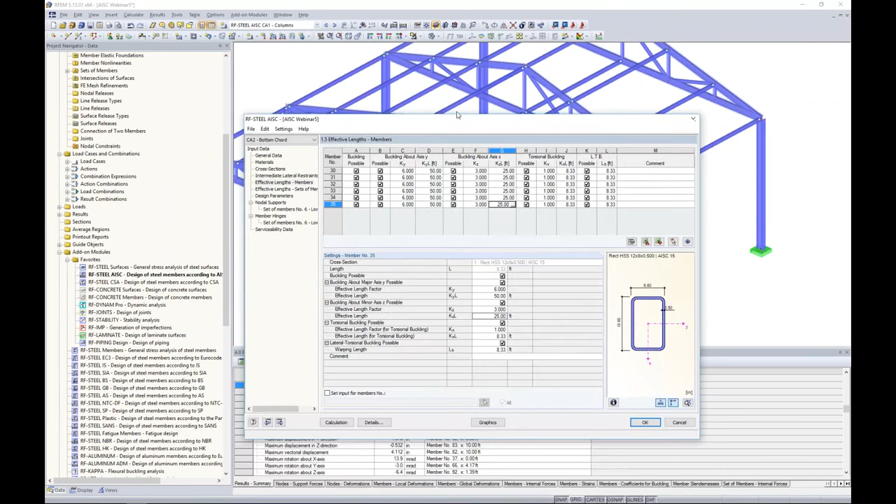Now, as for torsional buckling and lateral torsional buckling, again, this depends on your connection types, so it's really up to the engineer's discretion. I might say in this type of scenario that this small HSS member is bracing it for both torsional buckling and lateral torsional buckling as well. So what I can do, just like in Microsoft Excel, is highlight all these cells, hit Control C, and Control V to paste them into the adjacent cells. Same goes for lateral torsional buckling.

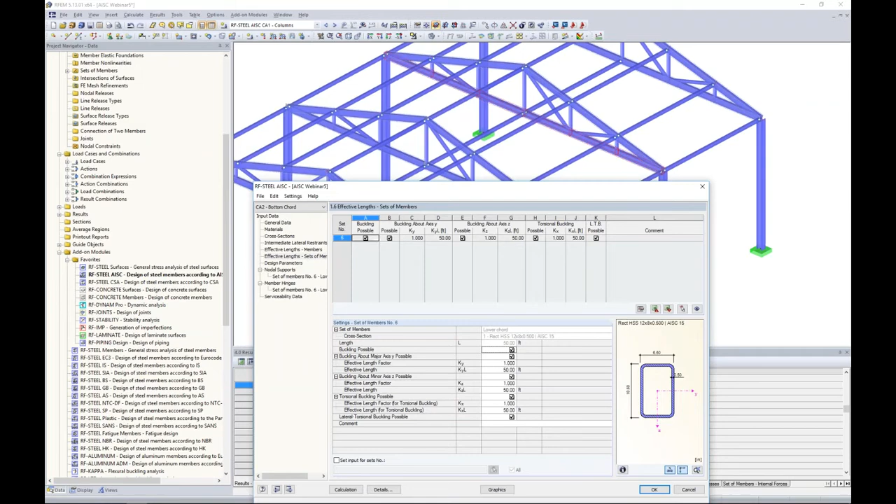So now that we have set all the unbraced lengths for our members, we want to move on and do the same thing for sets of members. Now we have one single set of members listed, and the program defaults to the full 50 feet in length. We can manually override this, but what I'd like to do is jump down to the nodal supports here. This was not available previously with just members. It's only available with sets of members, and this is where a big difference comes in for members versus sets of members.

With a set of members, because we don't require it to be in a continuous straight line, the program will actually run an internal eigenvalue analysis for this single set of members. This will come up with the buckling modes for that particular set of members and a critical buckling moment. So instead of weak axis buckling, strong axis, torsional buckling, lateral torsional buckling, we forego all that for sets of members according to the AISC, and instead run an eigenvalue analysis, which is a much more theoretical approach to come up with a critical buckling moment to take the place of that. So it's just more accurate.

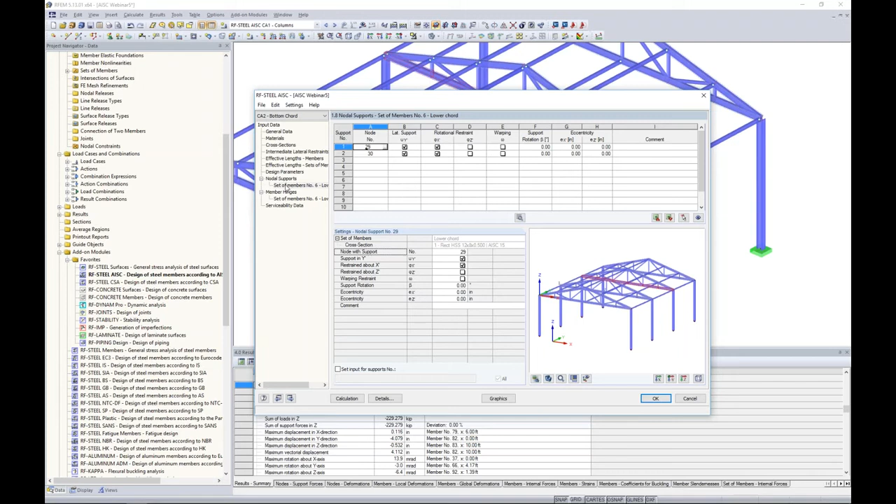So for this, with our nodal supports, you can see here our set of members is highlighted. I can zoom in here and change this to my local coordinate system. For my eigenvalue analysis, the program has to support these members internally for this quick little side analysis to determine what our critical buckling moment is.

It automatically places these supports at either end. Each node along the set of members length has 4 degrees of freedom: lateral translation, you can see here, we also have some rotational restraint, and we can even take into account warping. For example, if you have warping, we can check this checkbox, go into the details here, and account for warp stiffening such as an end plate.

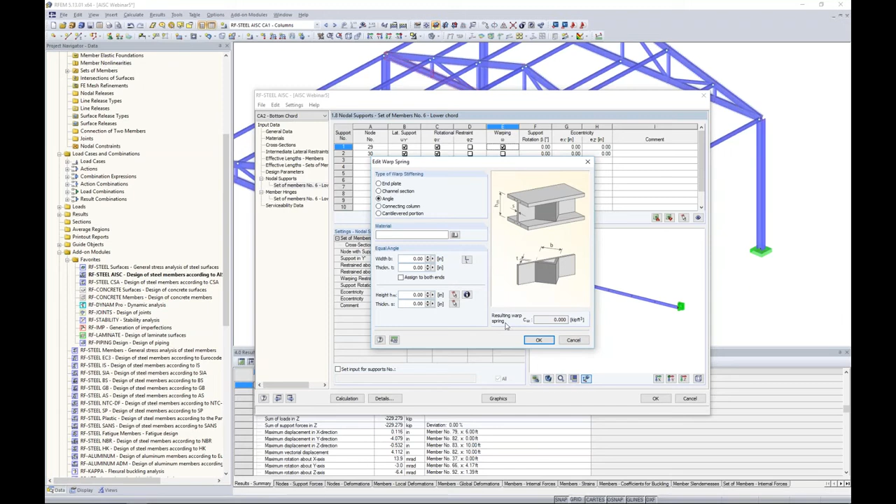Maybe you have a channel section or an angle. We just specify the material here, we specify the geometry of the warp stiffening, and the program will calculate a resulting warping spring. So I click OK out of this, and what will happen is we'll get a warping spring here that will automatically be accounted for within the eigenvalue analysis to give us a higher critical buckling moment. So pretty powerful for sets of members versus what we don't have for members.

Now, for this particular set of members, remember we have an intermediate HSS framing into it. So what I can do is just graphically select that node back in RFEM. I do want to brace it laterally, and I want to apply a rotational restraint. Now, each one of these has its own local axes as well, X prime, Z prime, Y prime, which are mentioned here.

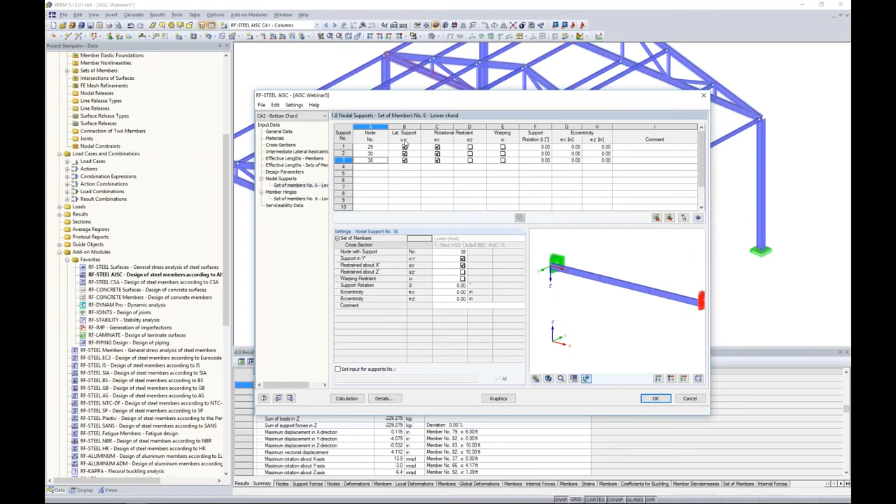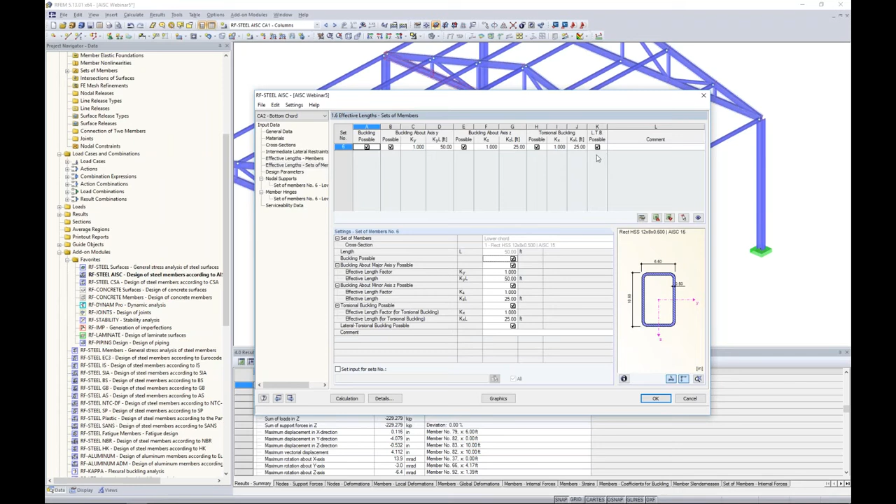Member hinges, same type of concept. If you had any member hinges along the member length, such as shear releases, moment releases, warping releases, you can account for them here, which will affect our eigenvalue analysis. So jumping back up to the effective lengths for sets of members, you can see now the buckling about the weak axis was automatically updated to 25 feet. Torsional buckling, 25 feet. Lateral torsional buckling will be automatically calculated based on the eigenvalue analysis.

Design parameters, nothing new here. These are just these various variables that go into play for our equations. Lastly, serviceability data. So the question here is we want to compare serviceability for both our members and sets of members.

The first thing we want to do here is choose member, and then we can graphically select those bottom chord members just as we previously had done to check the serviceability. I click OK. Now the reference length is set to 8.33. We actually want to override this here and set this to the full 50 feet. Now again, I can just simply measure back in RFEM at the click of 2 buttons. I hit my F8 key, and now that will set the reference length to the full 50 feet for each one of these members.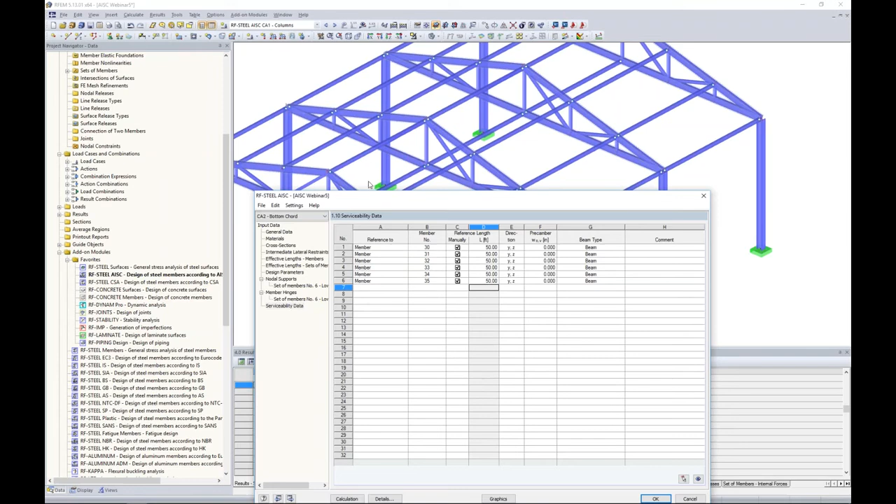For my set of members, I'm going to choose that from my drop-down box and graphically choose my set of members. I click OK. This is set to 50 feet by default, so that's great. So now we're kind of comparing the same thing here. We should come up with the same serviceability check.

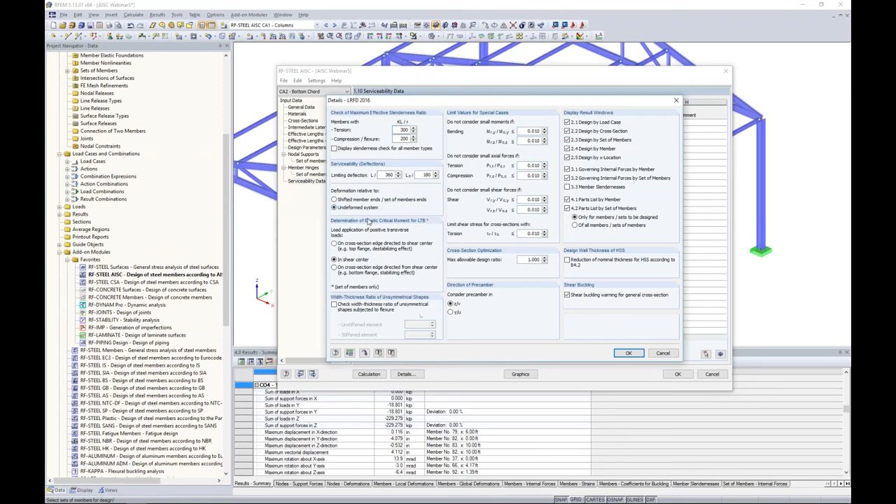But the one thing we do need to do under the details button is change this option here, the deformation relative. We cannot use the shifted member ends. That's just not comparing apples to apples. We have to use the undeformed system. Otherwise, we're going to get extremely different results. So in order to compare sets of members versus members, we have to compare that to the undeformed system, and I click OK. So now I'm ready to run my calculation.

Again, it solves within a quick second, and you'll notice here that I have my results, again, available according to the load case, according to the cross-section, which we only designed for one cross-section, but we also have design by sets of members and design by member. So two separate tables there. If we're looking at design by member, we already went over most of this, but I did want to show you, if we take a look at one of these HSS members, this section here, lateral torsional buckling.

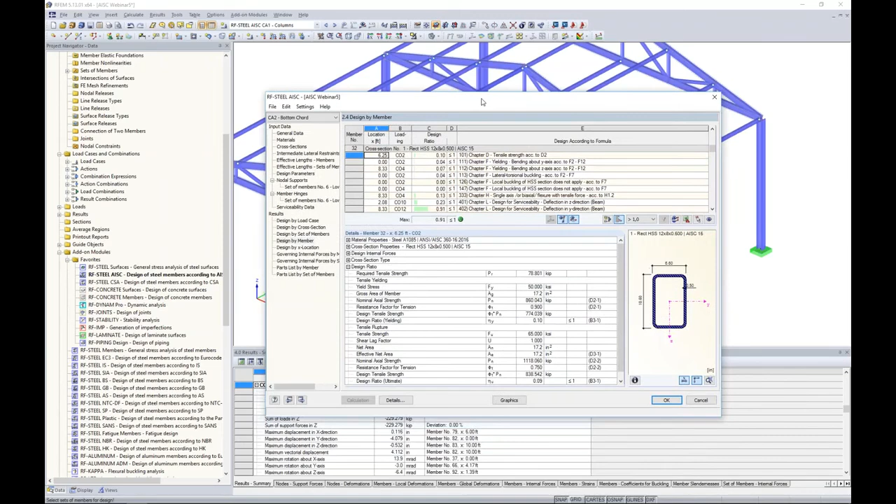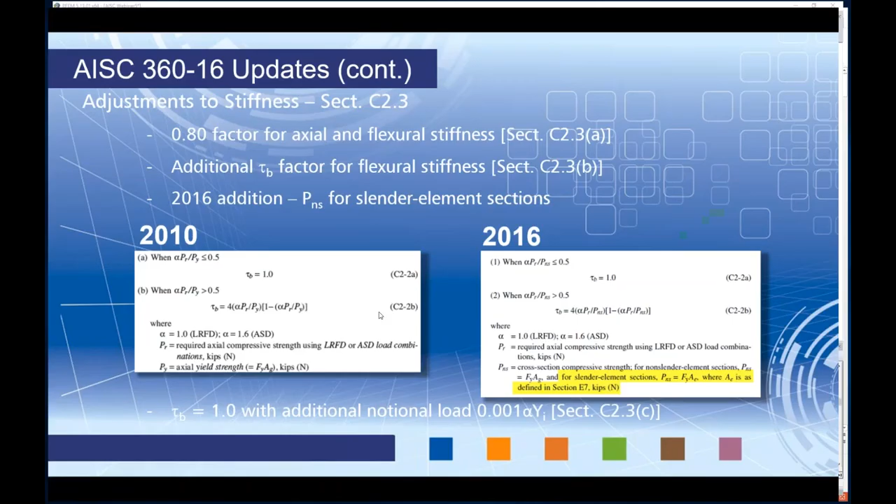This is a brand new section to the 2016 edition for HSS members. So let's jump back to the PowerPoint to discuss that a little bit further. So this is under the section HSS, lateral torsional buckling, section F7.4.

So going back to the model, we can see here again that lateral torsional buckling. Now, if I go to my sets of members, and we only design for one set of members, I don't see lateral torsional buckling here. And that's simply because, like I said, we forego those analytical equations from the AISC, and instead, under stability analysis, we run our eigenvalue analysis to come up with the elastic critical moment for lateral torsional buckling.

You can see the amplifier that was determined here from that, and we come up with 6,400 kip feet, which is incredibly high, but that's what our stability checks are going to be compared to. Now, in reality, what ends up controlling in this case would be yielding from our strong axis, which is 255 kip feet. But that is a huge difference between sets of members versus members. So something to keep into consideration there.

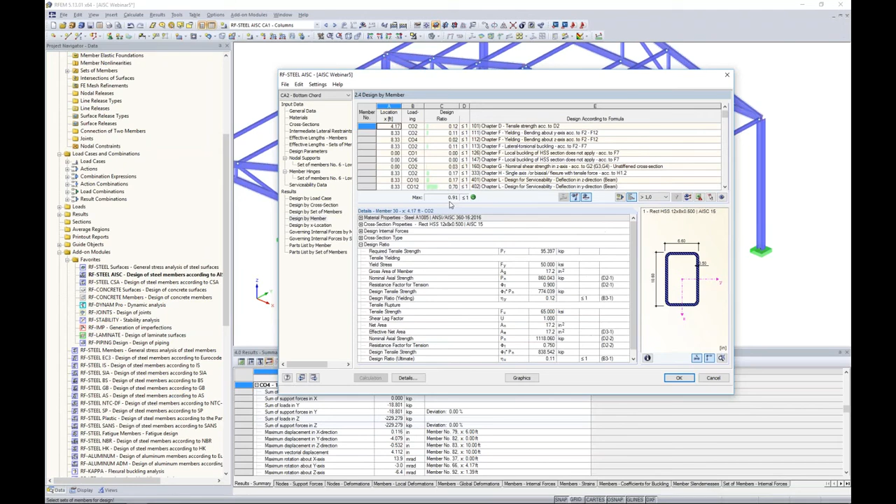Again, all the code references are listed here. Okay, so we can take a look here at the various code checks in our table. I think we see members versus sets of members. We do get the same code check. What we can also do, though, is view the information graphically. I think this is a little bit easier to compare to make sure that we are getting the same results.

So what I'm going to do is I'm going to highlight those bottom chords by holding down my control key. Maybe I create up here in my tools a visibility by selected objects, so now we can clearly lay this out. Well, this looks like our serviceability limit state design according to our add-on module, and the results are identical, which is exactly what we would expect.

Same thing goes for the ultimate limit state. We can see here we have these same numbers along the length for both bottom chords. So again, different approaches, but you should come up with the same results. Again, but you have to pay very careful attention to things like unbraced lengths.

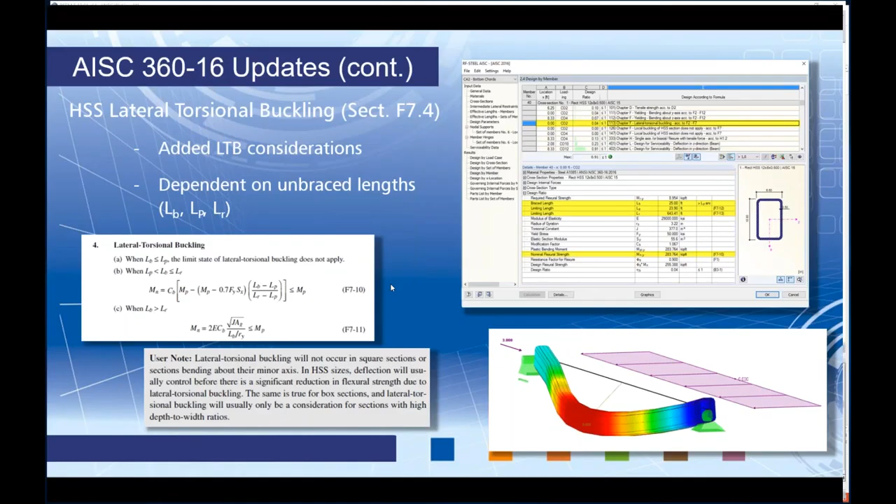Okay, so that really concludes our structure today, but there are several more points that I wanted to go over according to the 2016 updates that we just simply don't have these members available in our structure today. So this is definitely not an exhaustive list, but I just wanted to point out some of the changes that you'll see within the add-on module RF-STEEL AISC in reference to the 2016 edition.

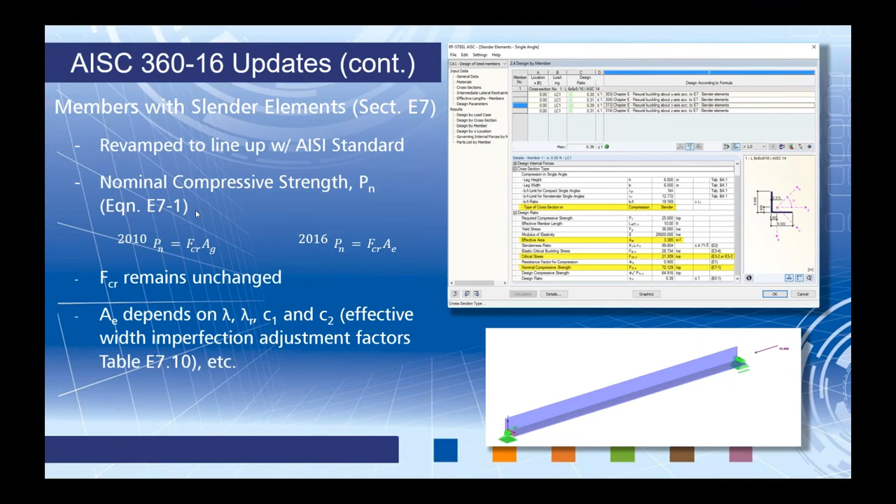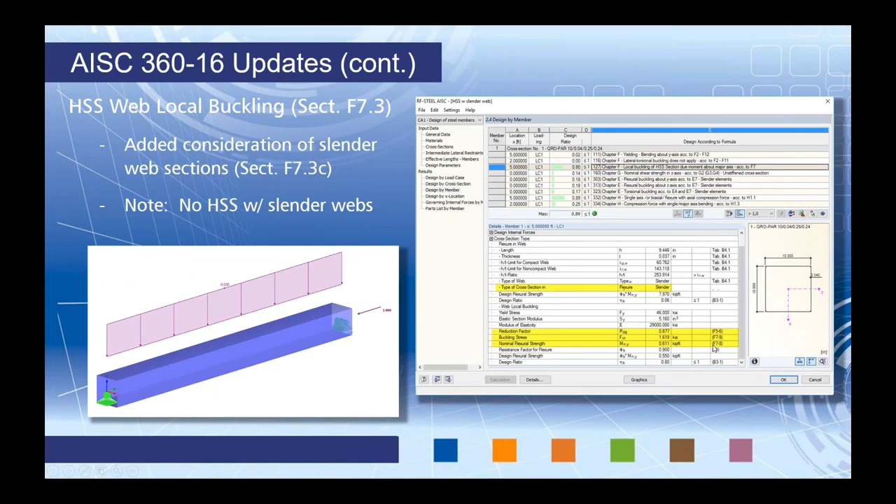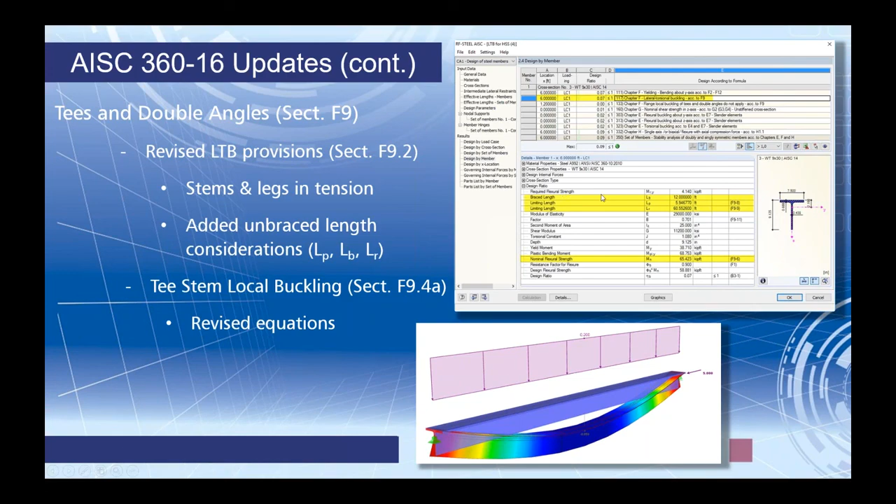Now also the T-stem local buckling according to section F9.4a, there were some revised equations here. So if you're running the 2010 versus 2016 in the module, you're going to see slightly different results available there.

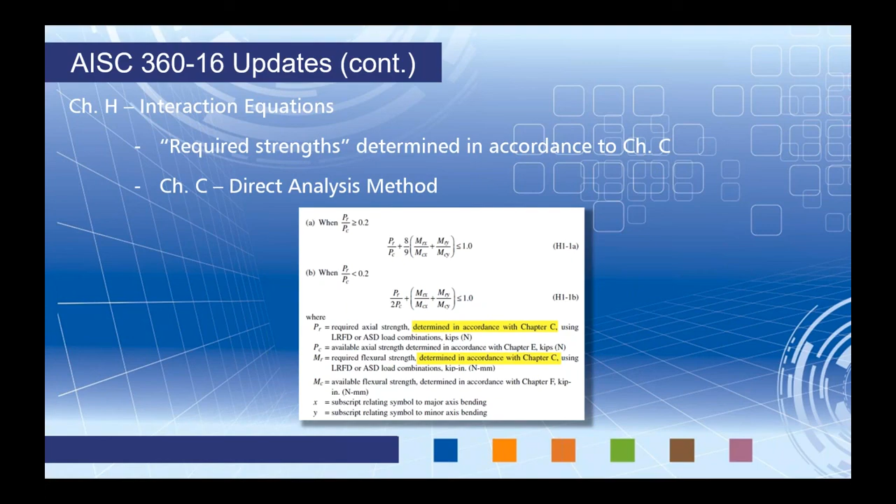I think that this is a pretty big milestone. Previously, the direct analysis method was never really differentiated much from the effective length method, but now in the 2016 version, this really seems like this is the way that AISC is pushing engineers to determine our internal forces. That's why I think the previous webinar I did, according to the 2010 version—because realistically nothing changed within that chapter except for the small section on stiffness reduction—will be extremely useful, as this seems to be the direction AISC is headed.

Okay, so that concludes the webinar for today. I know that was an incredible amount of information at one time.